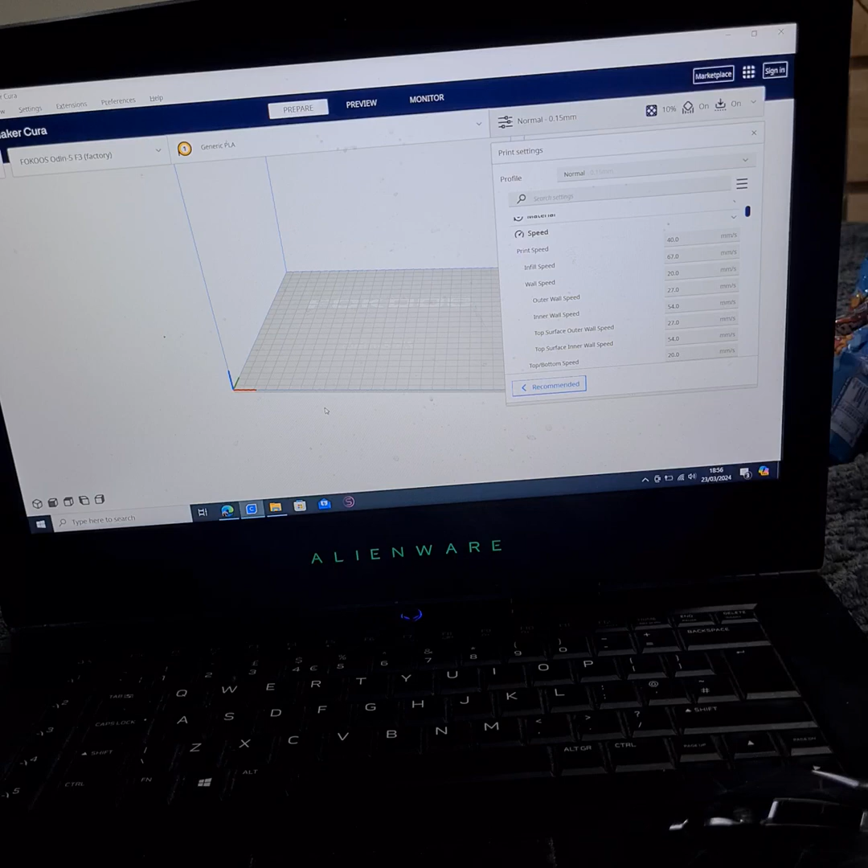Okay, so let's get going. Right, so you've been printing for a while on Cura and you decide you want to print something bigger for a change.

What you actually want to print is a giant robot with a big chest to go with it.

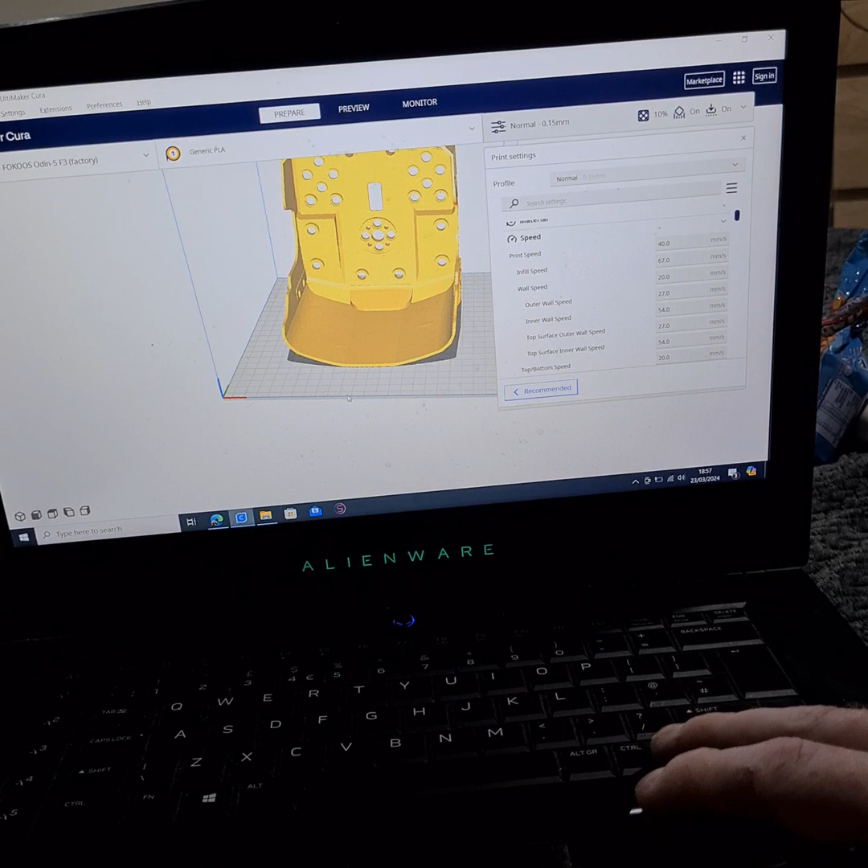So you've been using the factory Fokoos settings that Cura gives you. You arrange it where you think it's going to print really well. Face down, there we go. And that's the print speed on 40 and all there.

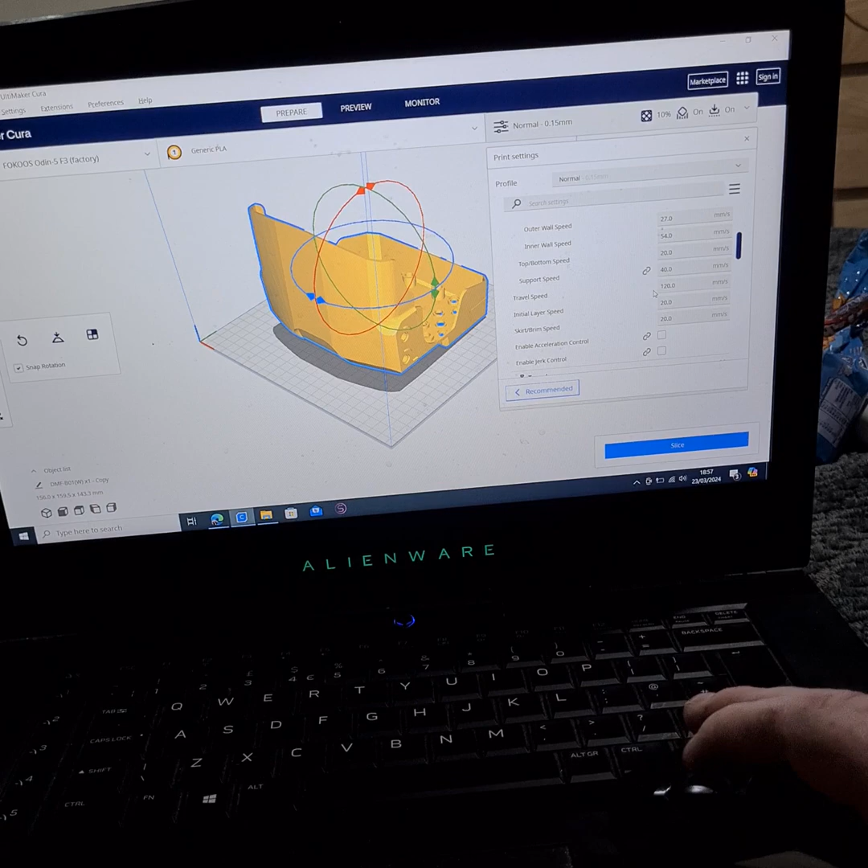We'll show it on basic for a second. Speed 40, maybe it's advanced. Infill nearly 70, wall speed 20, blah blah blah. Travel speed 120. Hit slice.

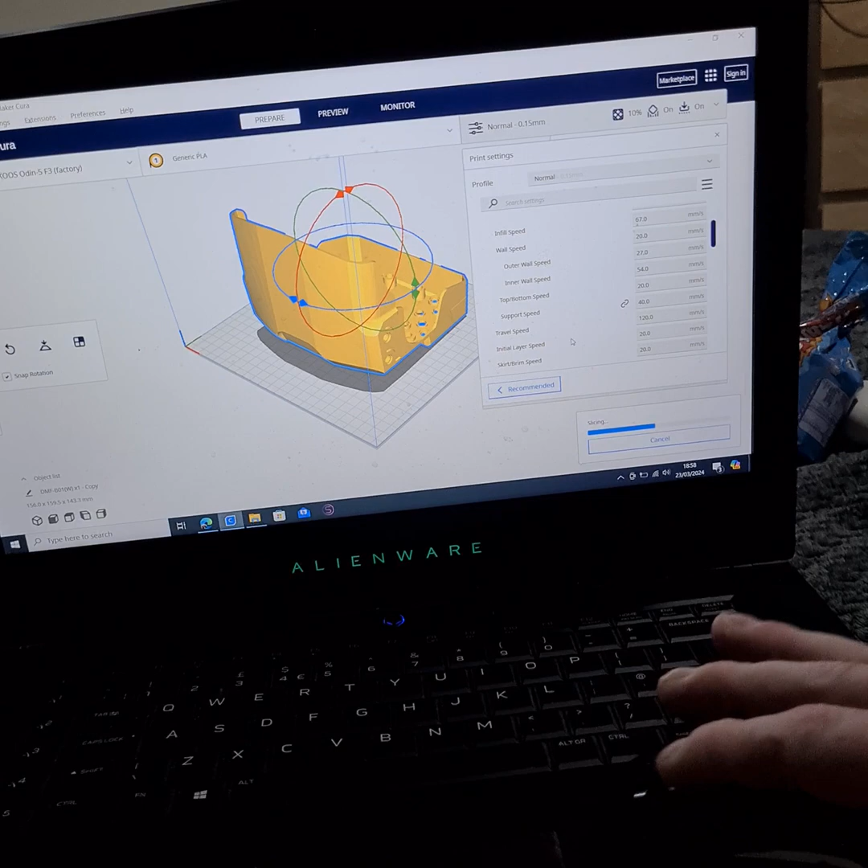When it finally catches up... Yeah, we'll leave it at that for now, on the normal. Yawn, taking a long time. It's going to take a full day to print at that.

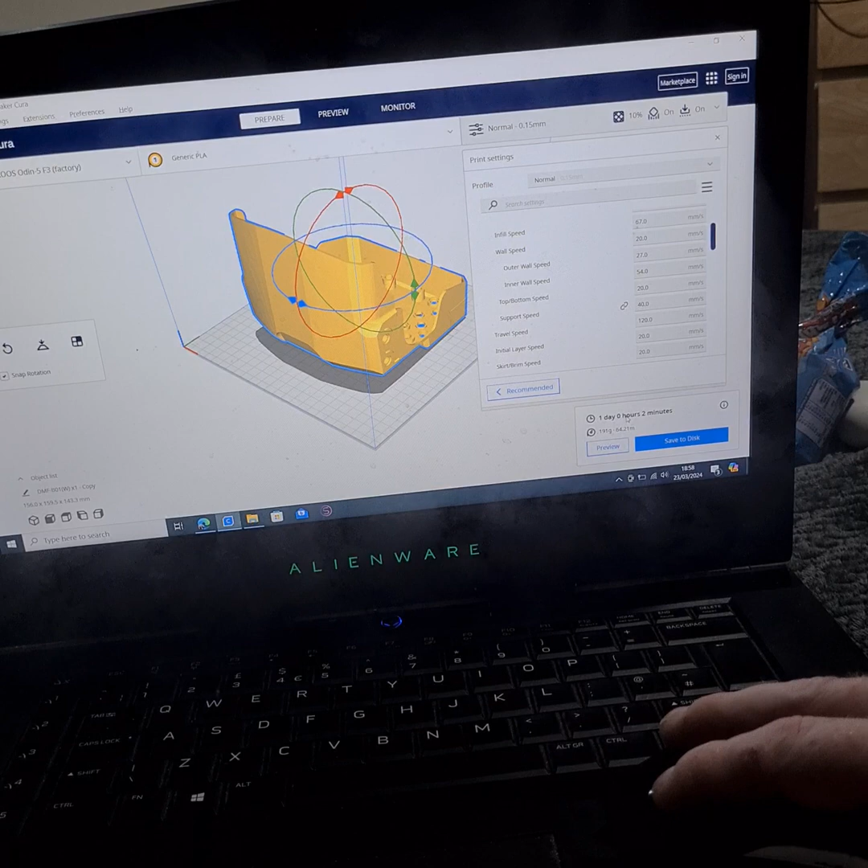So you think, right, I'll do it on the draft settings at 0.2, and we'll see if this is any better.

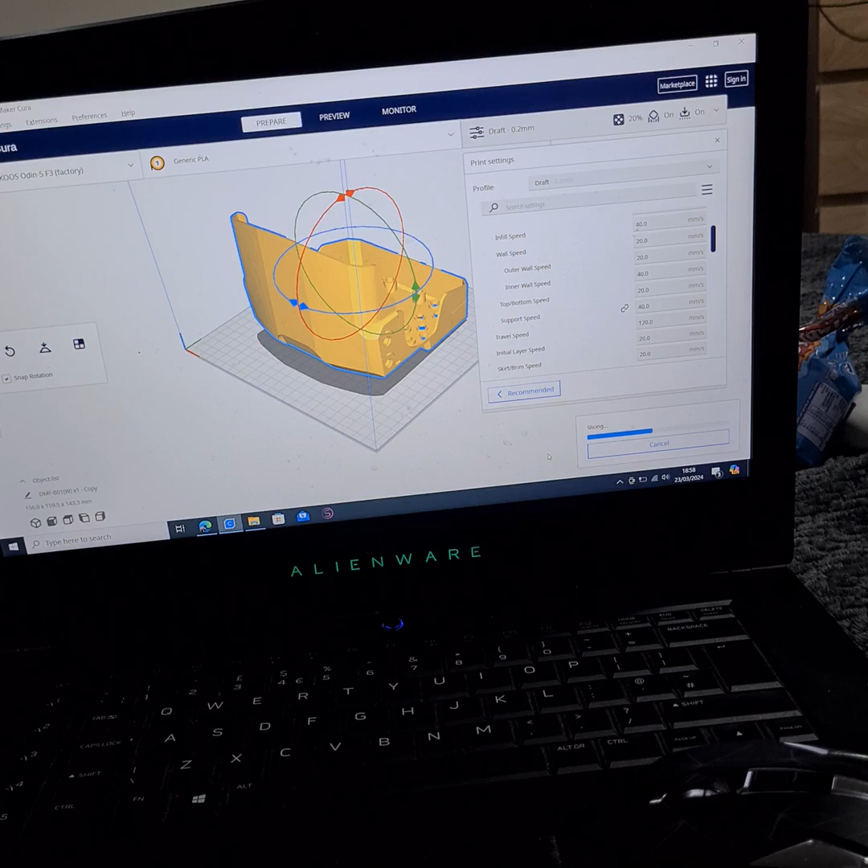And anybody that uses the factory settings on Fokoos as well will tell you that it quoted as a day, so it'll probably take 2 days, because that's the way that it works, unfortunately. But we're going to fix that anyway.

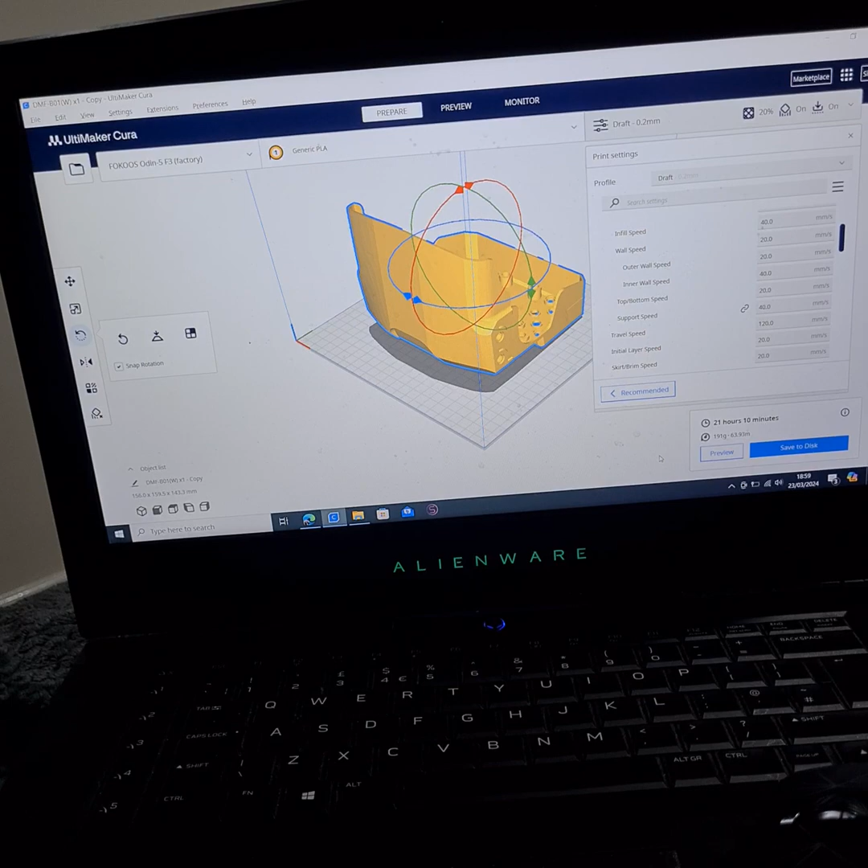Yep, so now we've chopped it down to 21 hours. Not quite what we're after.

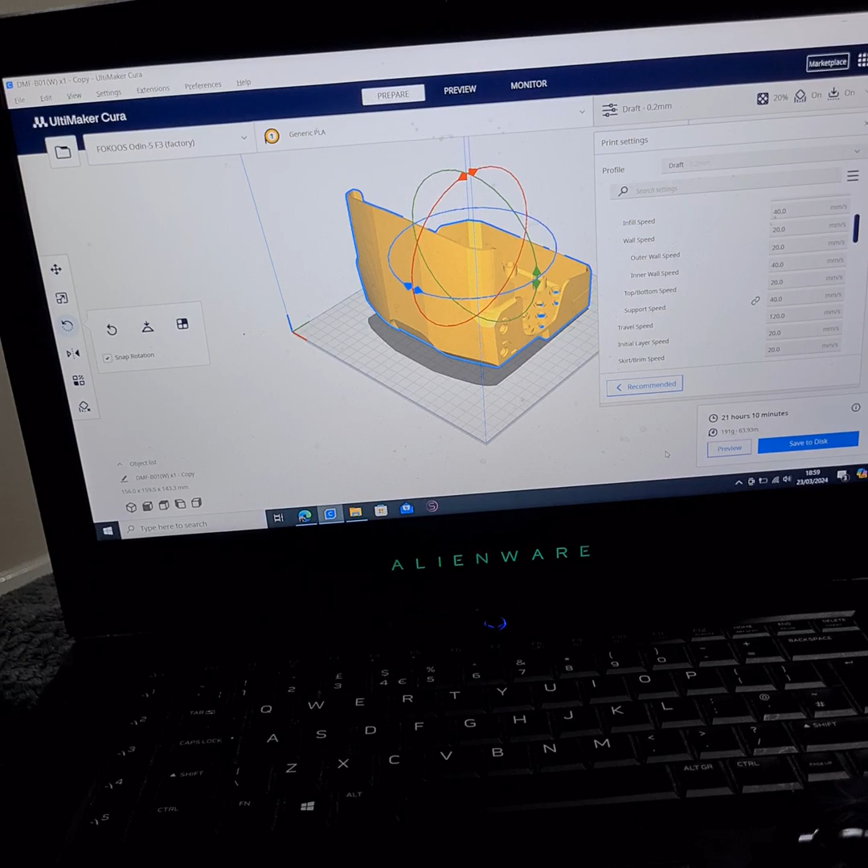So you think, I'll message me mate who's got a Prusa Mark IV, and we'll see what, just run it through the slicer and see what he gets. And Prusa Slicer turns around and says, nearly 8 hours.

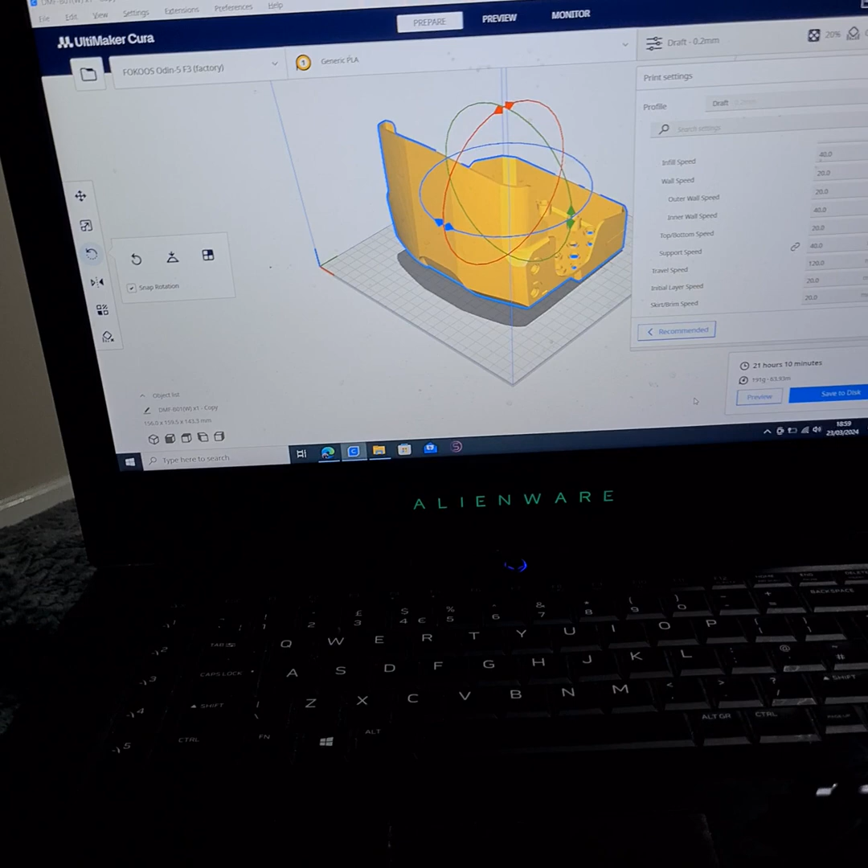There we go, at the same direction. Now, I don't know what settings, what speeds they've got. Well, let's have a look.

Prusa Mark IV, and it's 800 quid. And let's see. Features: high printing speed, blah blah blah.

Maybe I'm just jumping too fast, but anyway, you're thinking, well, there's got to be a faster way. Has to be faster. So you start YouTubing for videos to make it faster, and you do manage to chop the time down a little bit, but still, it doesn't work.

So you go to Fokoos, you have a look at downloads, and you go to the Fokoos Odin-5 F3 printer. Yeah, import Cura profile. Seems pretty good.

Odin PLA, there's a picture and a picture and a PDF, and you think Odin PLA, yep, it'll be in there, right? Yep, download.

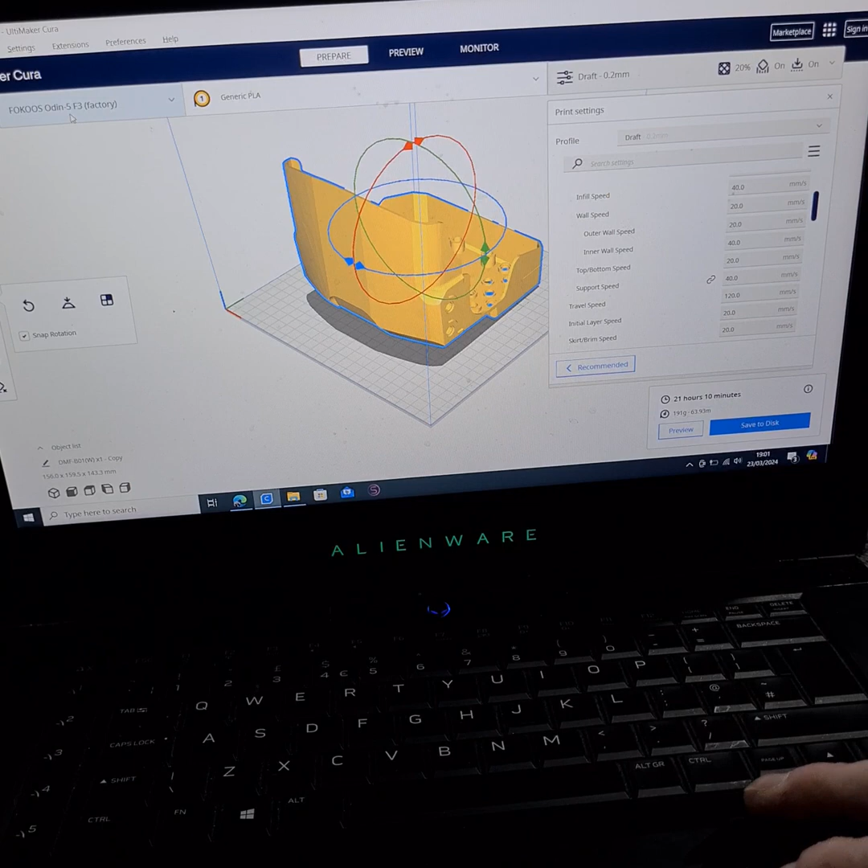So you go to the Cura factory, manage a printer, and profile, import, downloads, Odin PLA, and it's not there. Well, that sucks.

So why is it not there? Well, it's because it gives you a lovely little text file instead. So we'll open Smoothie Odin PLA with Notepad.

Better not make it want to open that every time. So what's this? Draft Odin PLA FDM. Yep, skirt layer height, print bed temperature 60. Layers. Nothing in there really that's going to speed anything up.

Except retract before extra wall. So you open up the next one, and here's some stuff. And so you've got acceleration settings, bottom layers, blah blah blah, print temperatures, flow, speeds are here somewhere, retraction stuff, combing distances, all that good stuff.

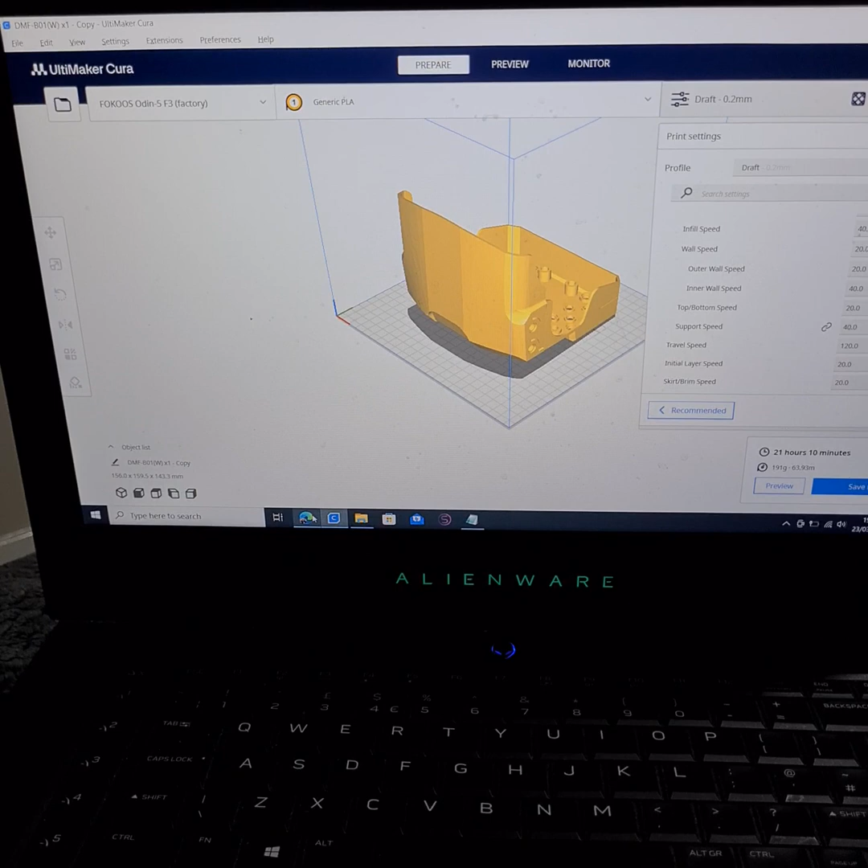Except, since it's not a profile, can you imagine taking forever putting all that crap in? So the next smartest thing for me to do was add the printer, add a new printer, find a printer that almost matches the Fokoos, which turns out to be a Creality Ender 3 V3 SE.

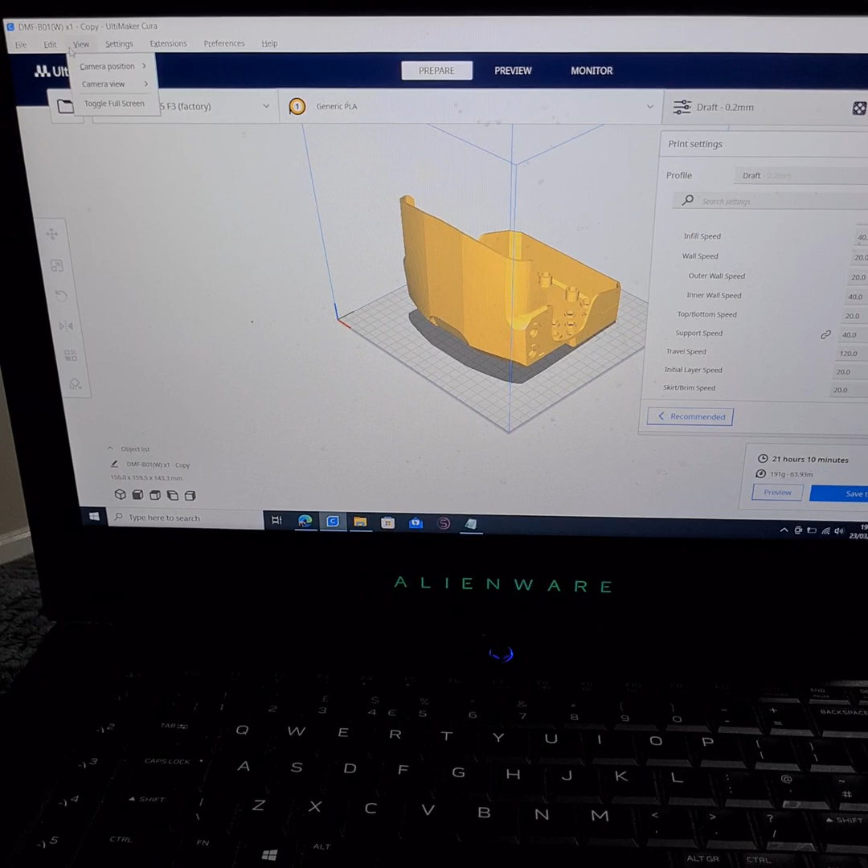I have checked the settings, I'll show you it in a bit, but printing speeds at 250, blah blah blah, all that good stuff. So let's add that into Cura instead. So: file, edit, printer, add a printer.

Non-ultimaker, Creality, Ender 3 V3 SE, cool, add.

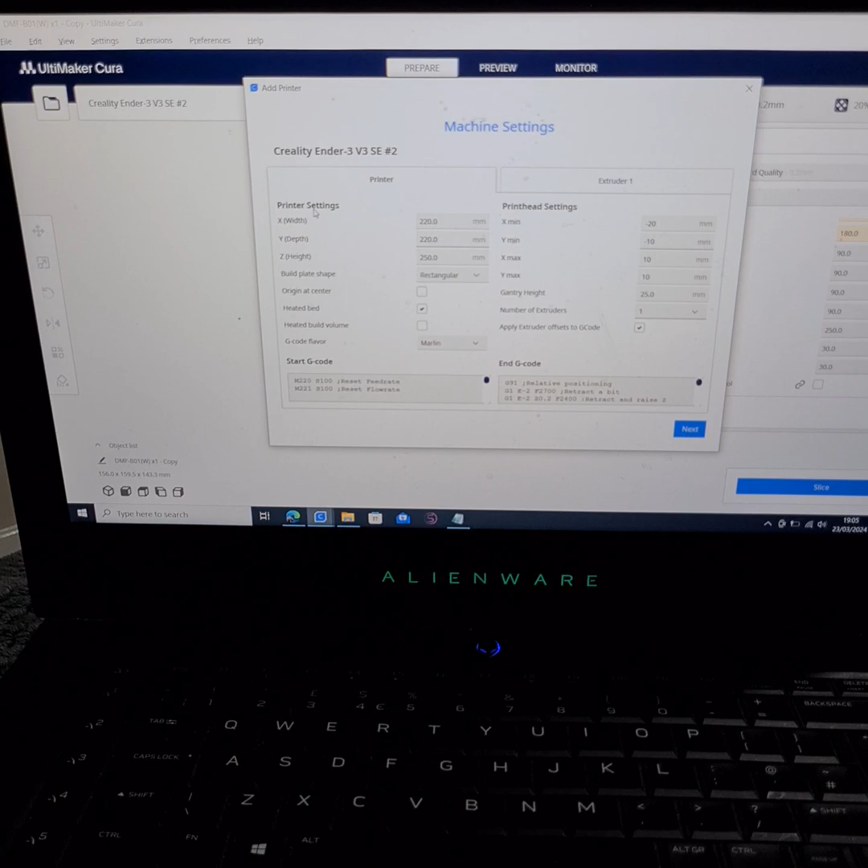Right, and the width, we'll change the bed there to 235 by 235, Z height at 250, so that's bang on. Heated bed, yes, perfect. Build volume, start Gcode.

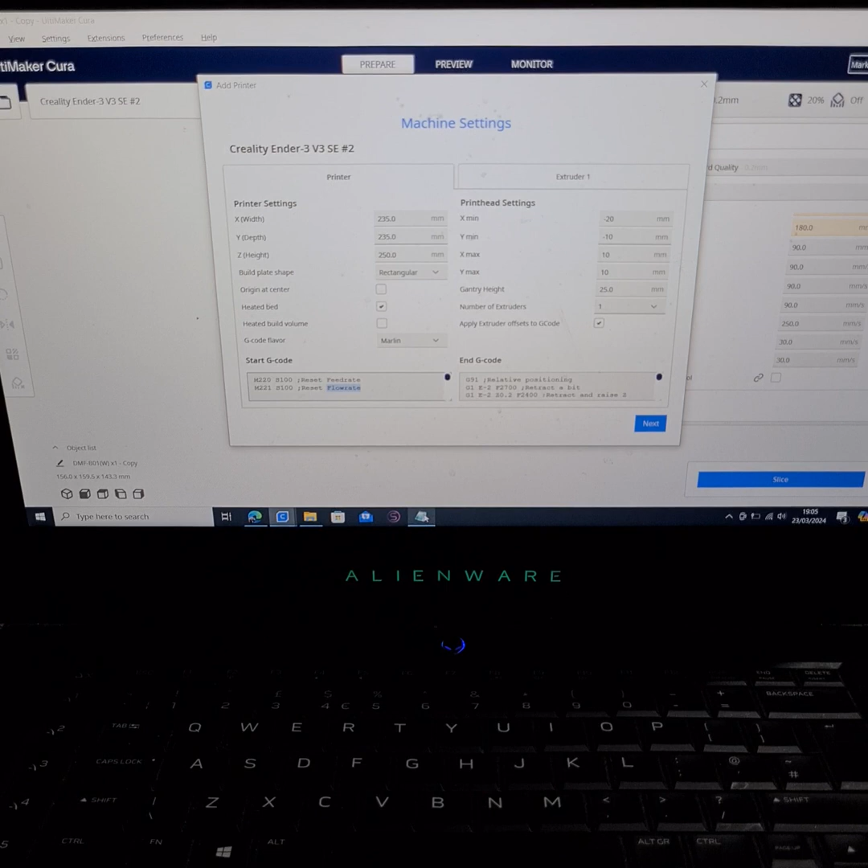Okay, and was that in here? No. Was it in here? No.

However, I've already got it copied, but let's just say it's all that. I believe that was correct, the gantry height. Don't recall the gantry height, but let's have a look.

Blah blah blah. Nah, nothing regarding the gantry height, so we'll just hit next. Oh, extruder 1.75, nozzle offsets.

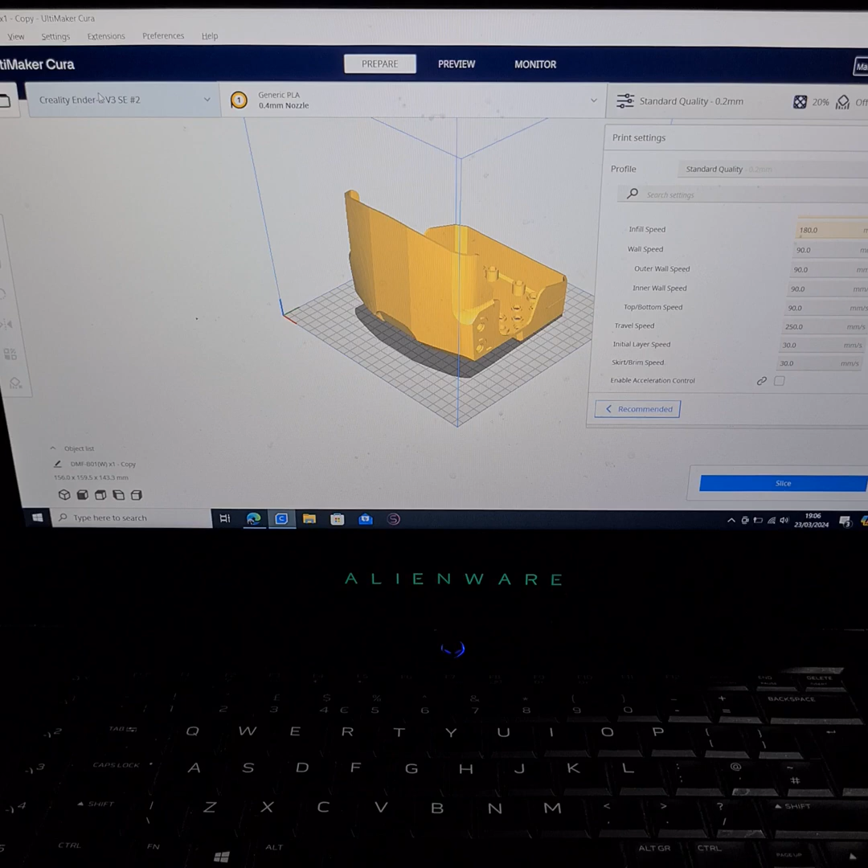Right, okay, so now we'll file, right, manage printers, right, activate the factory one, machine settings, 235, 235, right, so we've got 20, 10, 10, 10, 10, 1, and apply the Gcode.

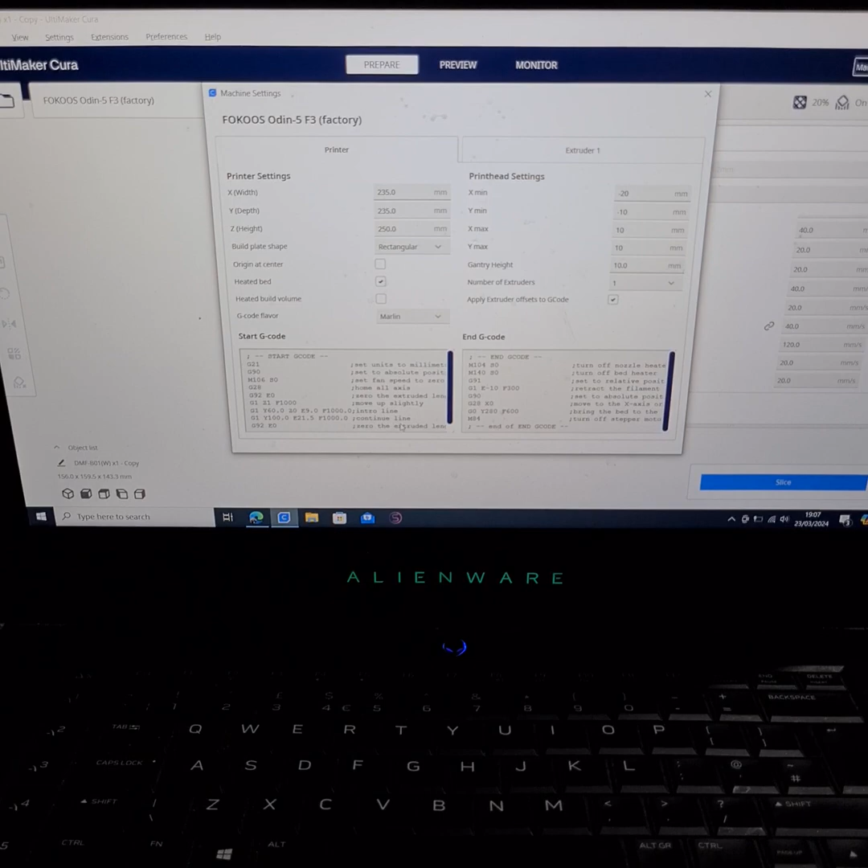So we'll copy the start here, Control A, copy, close, activate, machine settings, gantry height was 10, start Gcode, Control A, and then Control V.

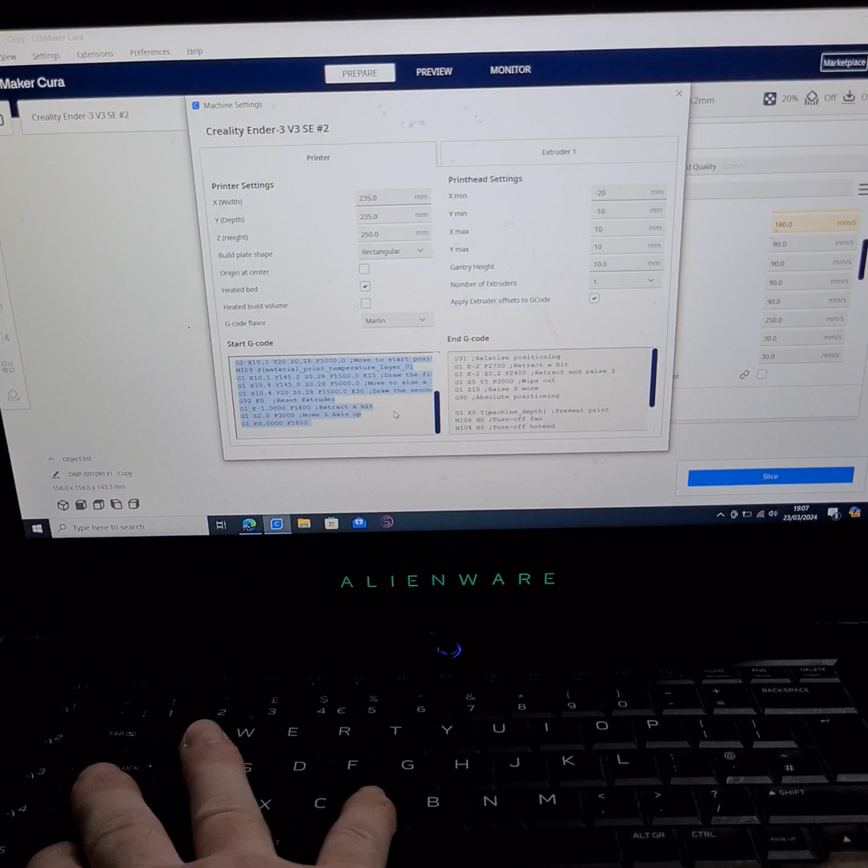There's what's starting Gcode. Extruder, nothing, nothing, nothing. Alright.

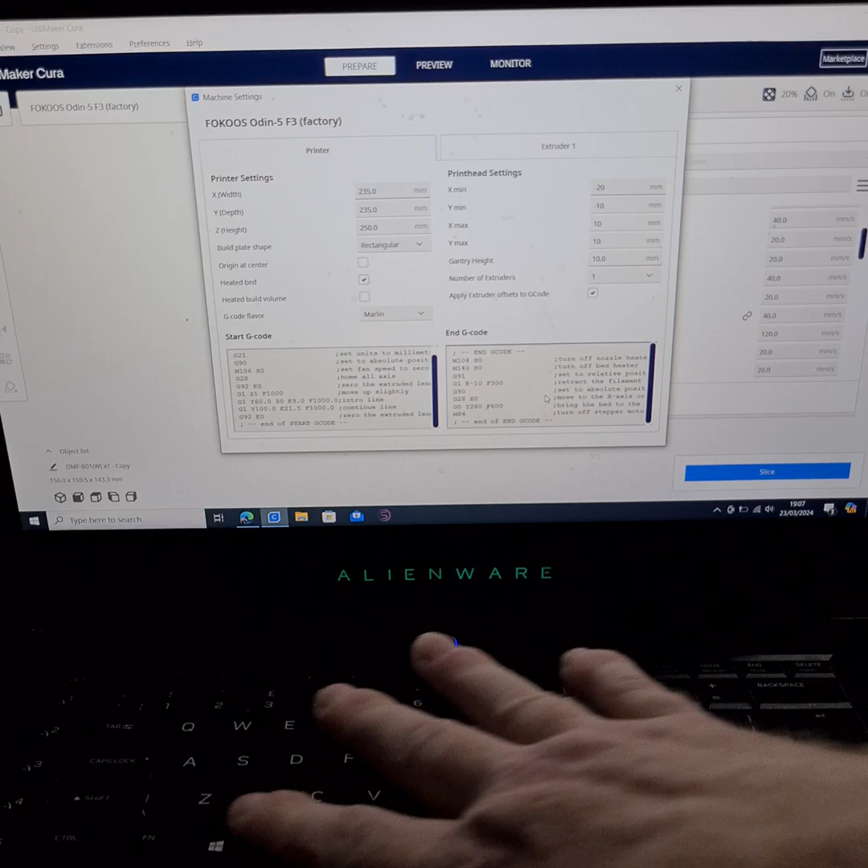Okay, so we'll go back to a factory, activate the factory, and get the ending Gcode. Control A, Control C. Just double check that. Oh, and nozzle size. Don't need to do the nozzle size.

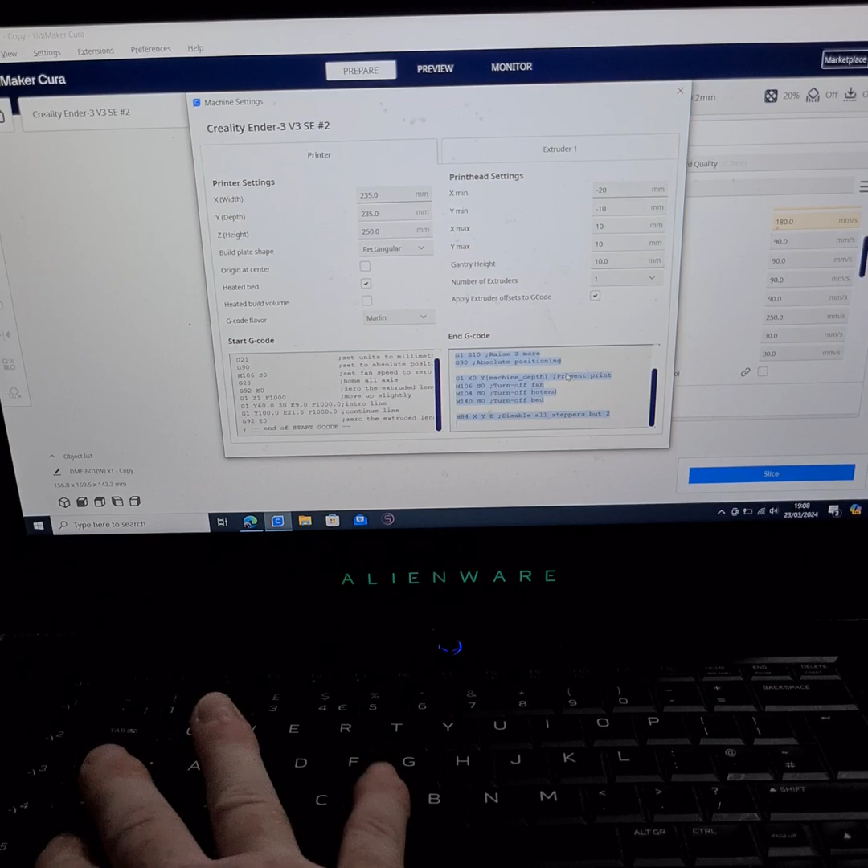Okay, back to SE, activate. Machine settings, ending Gcode, Control A, Control V. There we go. And we're all done. Okay, close.

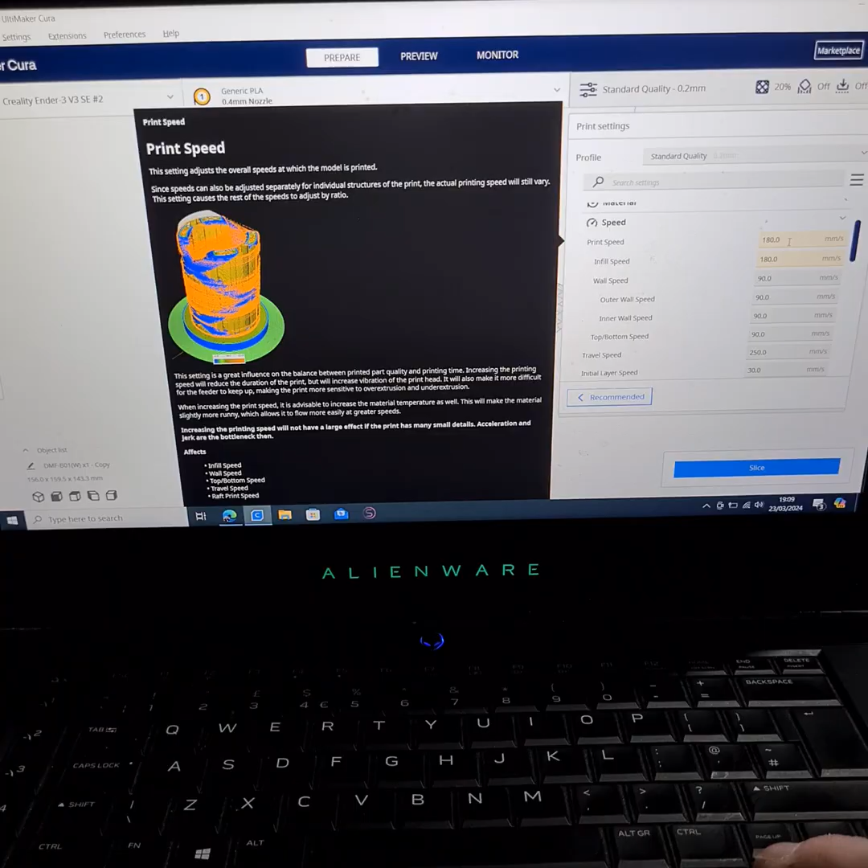Now we could set up the MKS Wi-Fi plugin on it, which would tick it. Yes, preview settings, yes, Wi-Fi support, yes. No, no, no. Default. Close. Close. And there we go. We've got some pretty fast speeds there already.

And so it's printing at 180, 90, 90, travel speed 250. Okay, now that's at a 0.2.

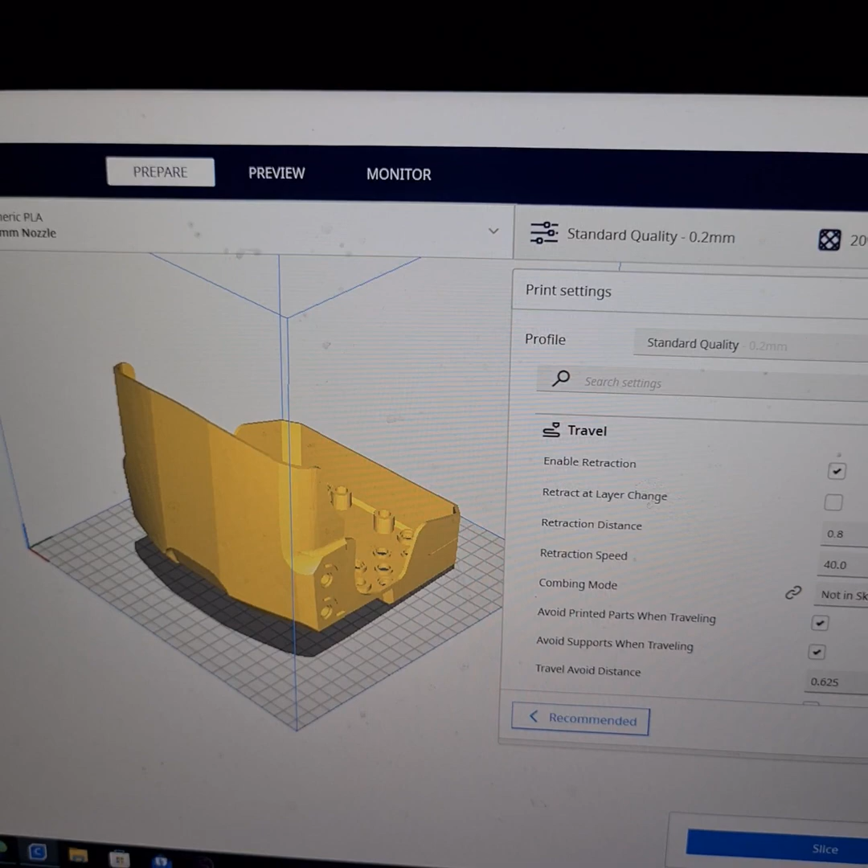And now is the point where you could manually enter your things from here, from the file we downloaded. But I'm going to share this profile.

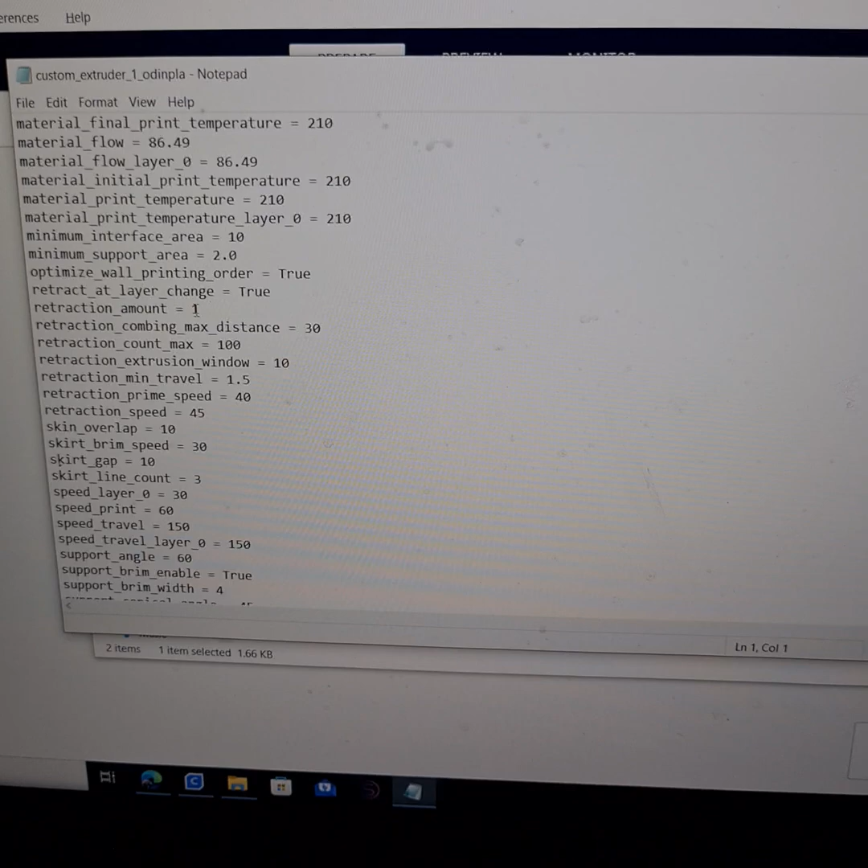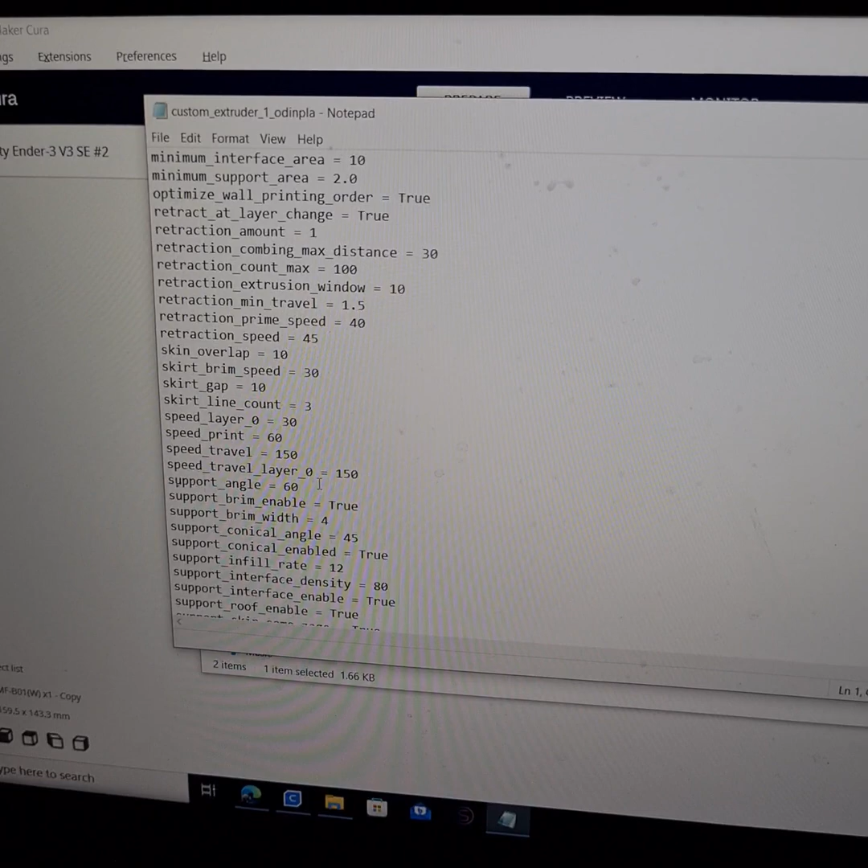What we're interested in is the retraction stuff. Retraction amount was 1, and the speed is definitely capable of 150. And obviously I've tested it, I've ran it faster, so mine's a bit faster. Support angle of 60, all that stuff.

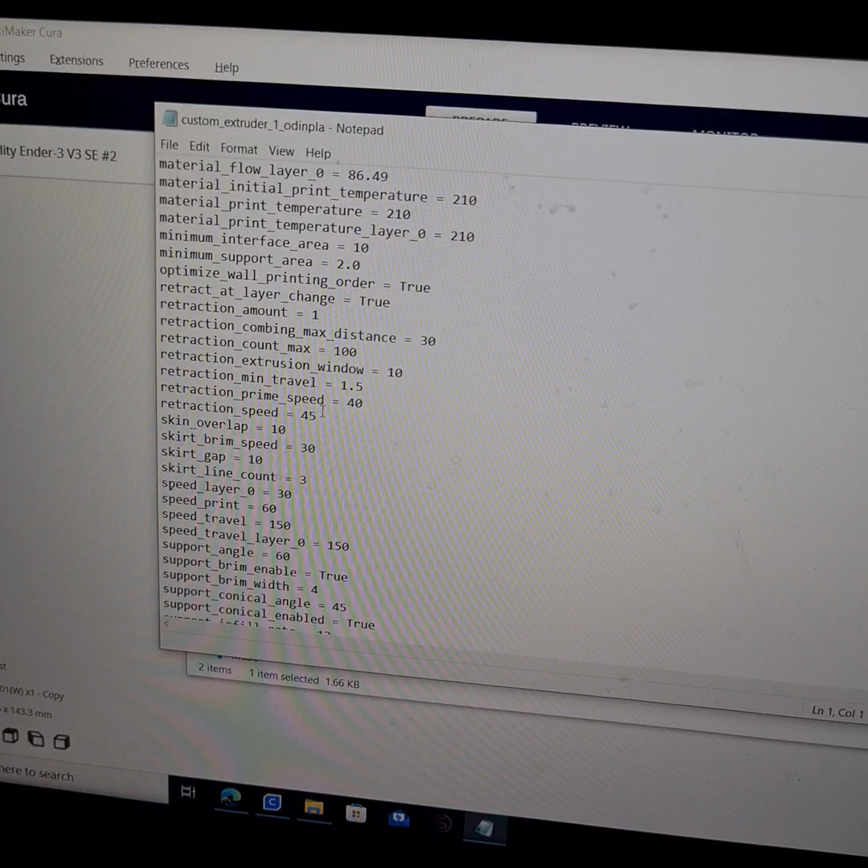Yep. And I know there's jerk settings in here somewhere, because it tells you to set the jerk at 10 and the acceleration at 800. And the retraction and things, support angles, blah blah blah blah blah.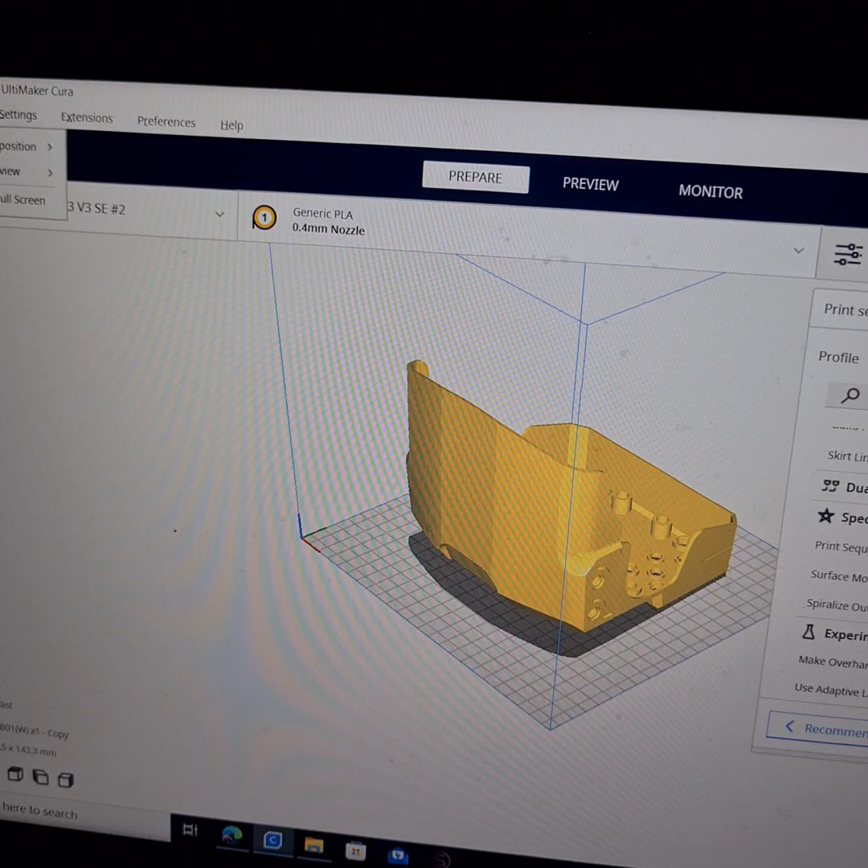Right, however, at this point you would go to... oh, also the retraction speed doesn't work very well at 0.1. It's actually faster running it at my settings at 1.2.

And so we go profiles, import, and we'd import our 2 profiles. I'm not going to do that because I've already got them, you know, they're there already.

Okay, so now I could go there. Oh, you at this point you might want to close down Cura and reopen it, because even though you change the bed size and everything else, it doesn't actually adjust the bed size.

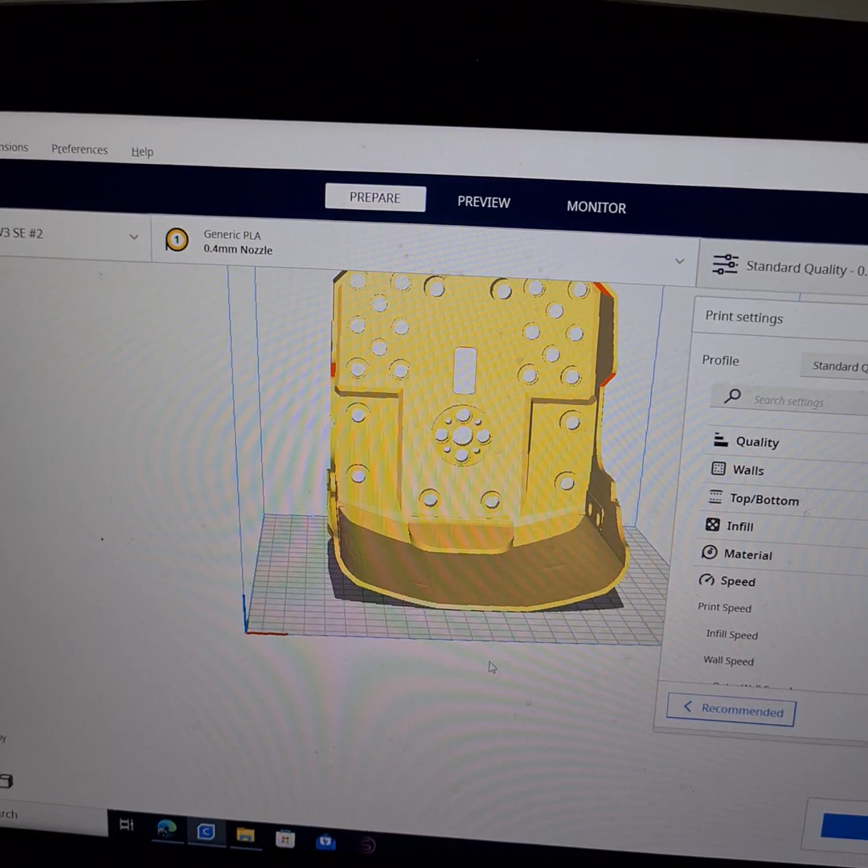We'll close that off. Won't close anything else off. We'll just go to my 3D Designs, STL. How about mini doubled body? Drop you in, rotate you around.

We are on the Creality that we've added, and we know our bed and everything is set up perfectly, and we hit slice.

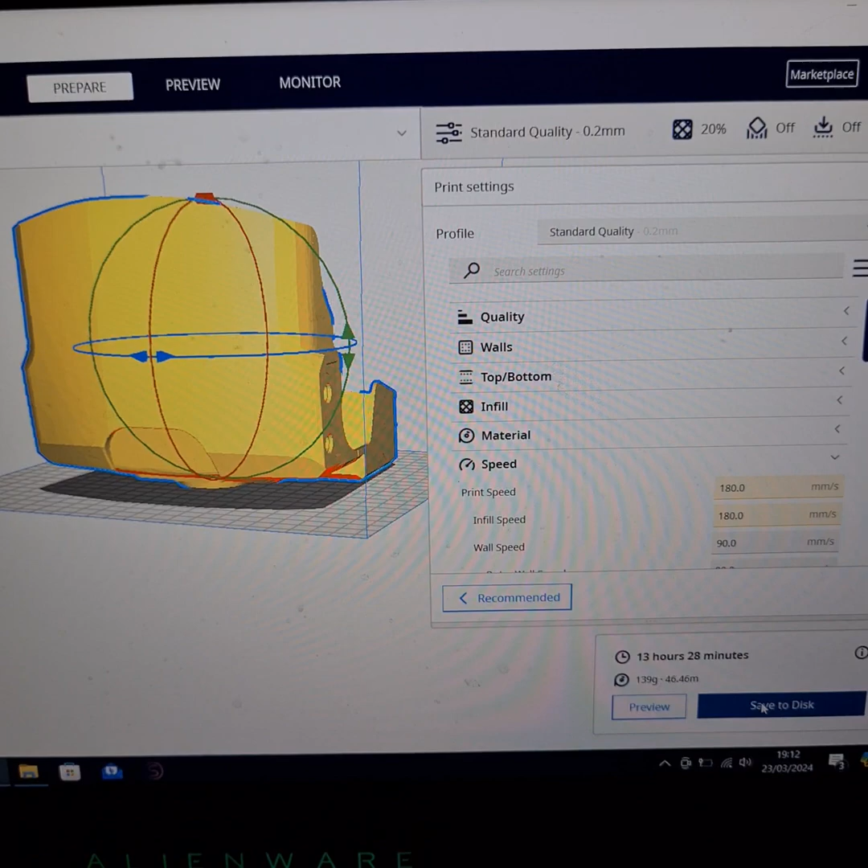Oh, that's a standard quality, it's not using my profile. But 13 hours on their standard.

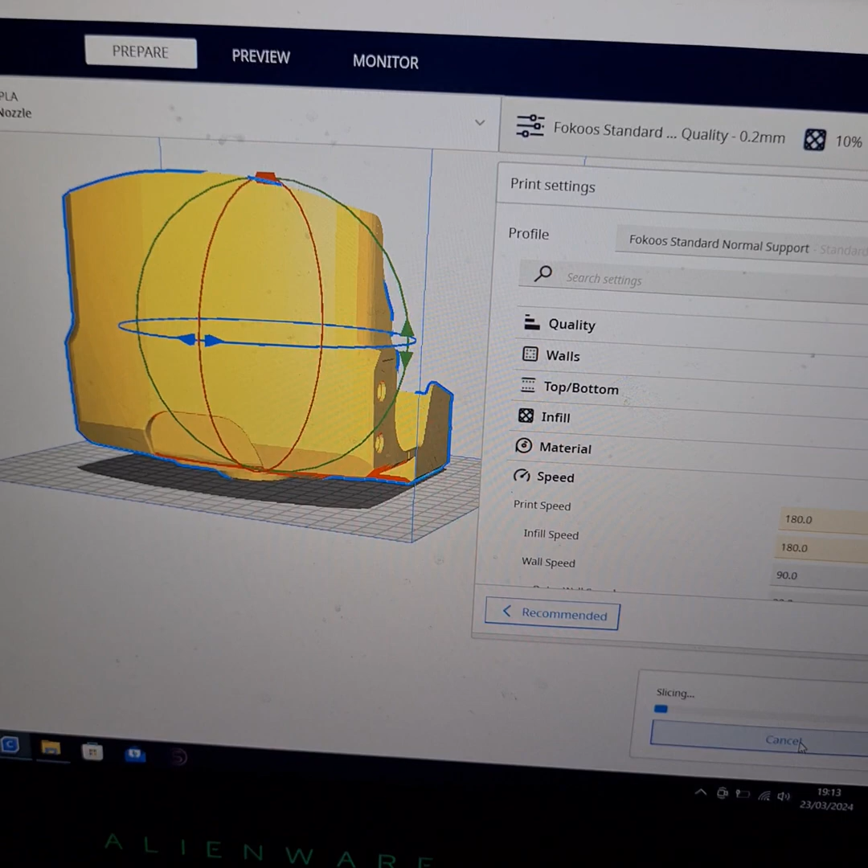So we'll use my standard normal support. By the way, I have things on mine like combing and things, so you know, you should get better quality.

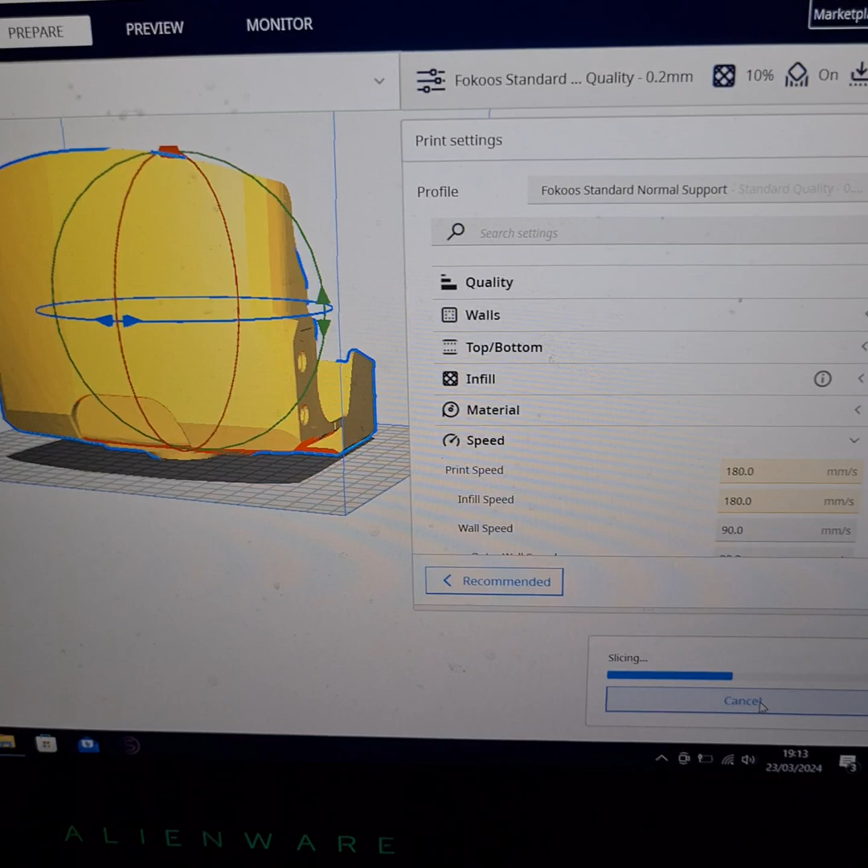And the only reason I add the Creality Ender is because it's so close to the Fokoos settings that they give you that it was faster to just modify that than create a load of others.

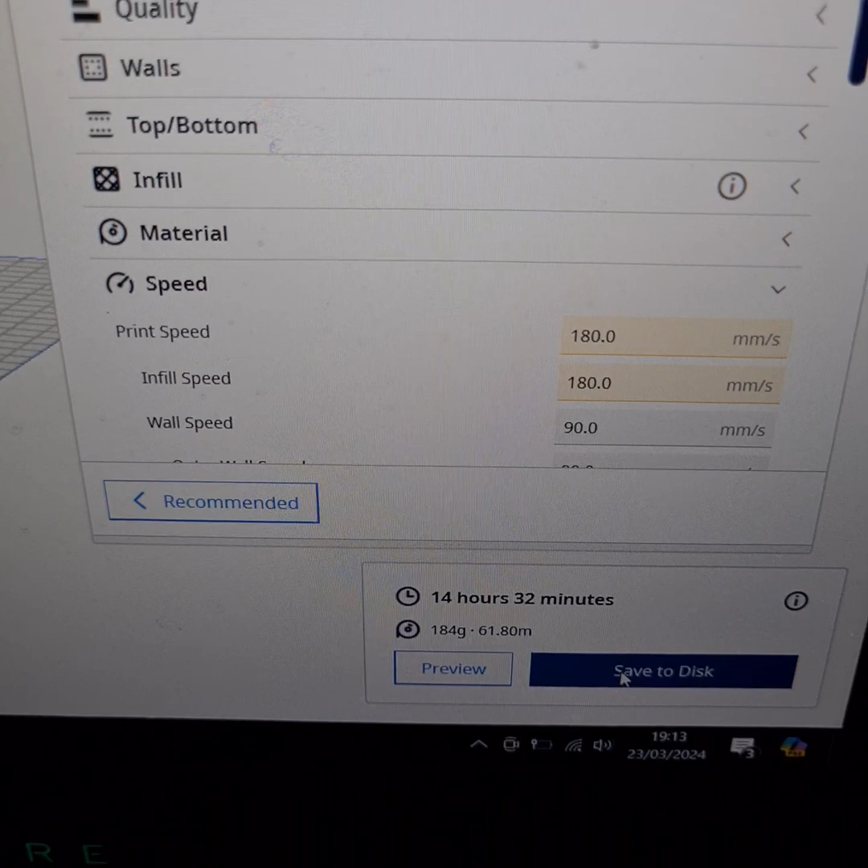Okay, and now, although it's not as fast as theirs, but I know theirs doesn't have supports enabled and whatever else, but there's 14 hours and 32.

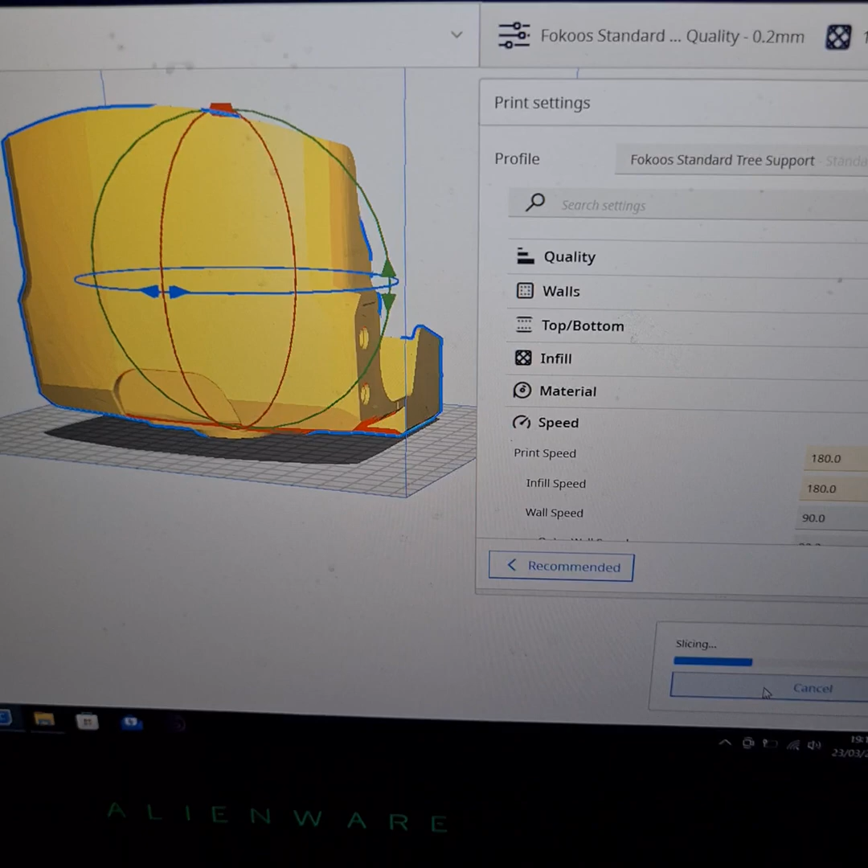And another benefit of it is it's actually accurate. What it quotes you, chances are you'll be done quicker than it actually quotes you. That's with the tree supports.

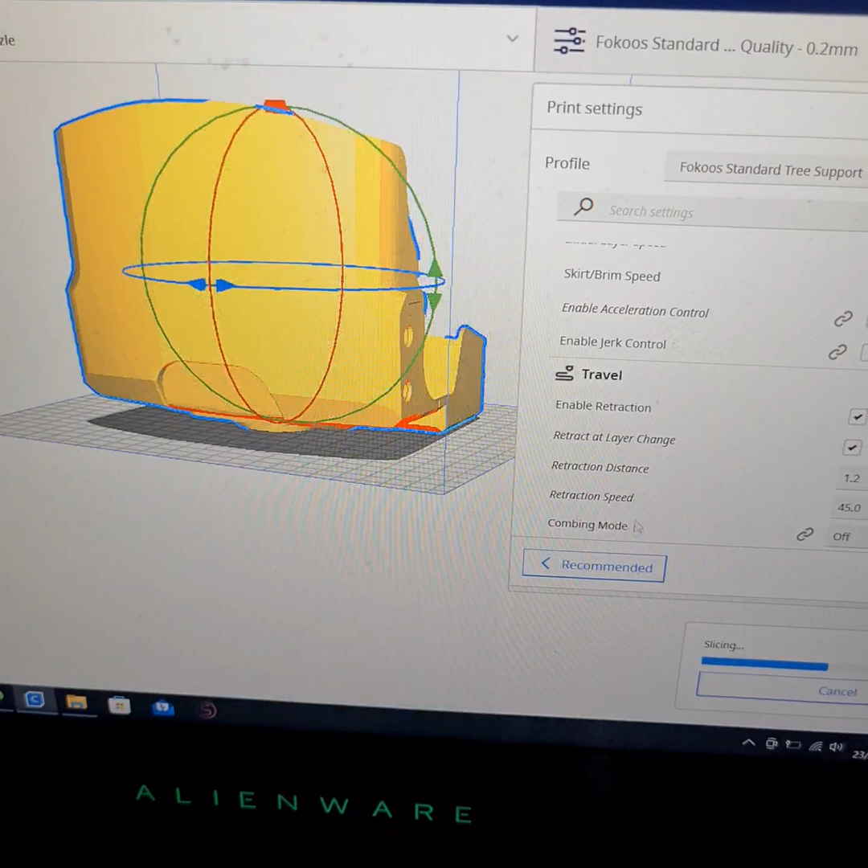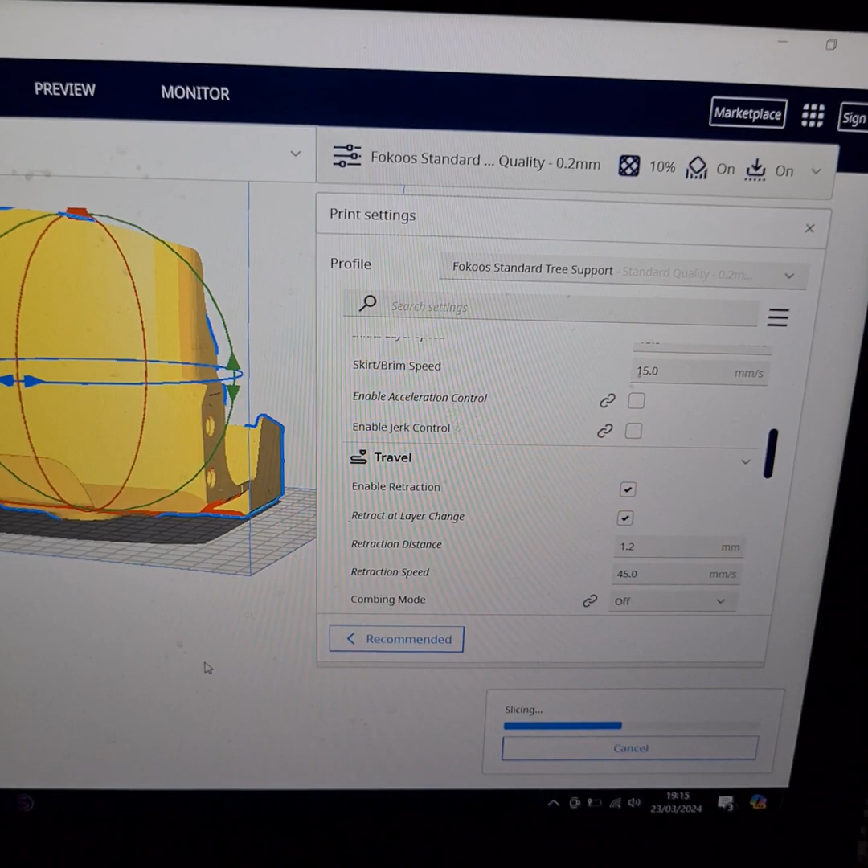Now, I do recommend searching around YouTube for videos on how to make Cura faster, and you know, some might work, some don't. I mean, I don't know how many hours worth of watching videos and familiarizing myself with Cura, but yeah, these settings I'm happy with.

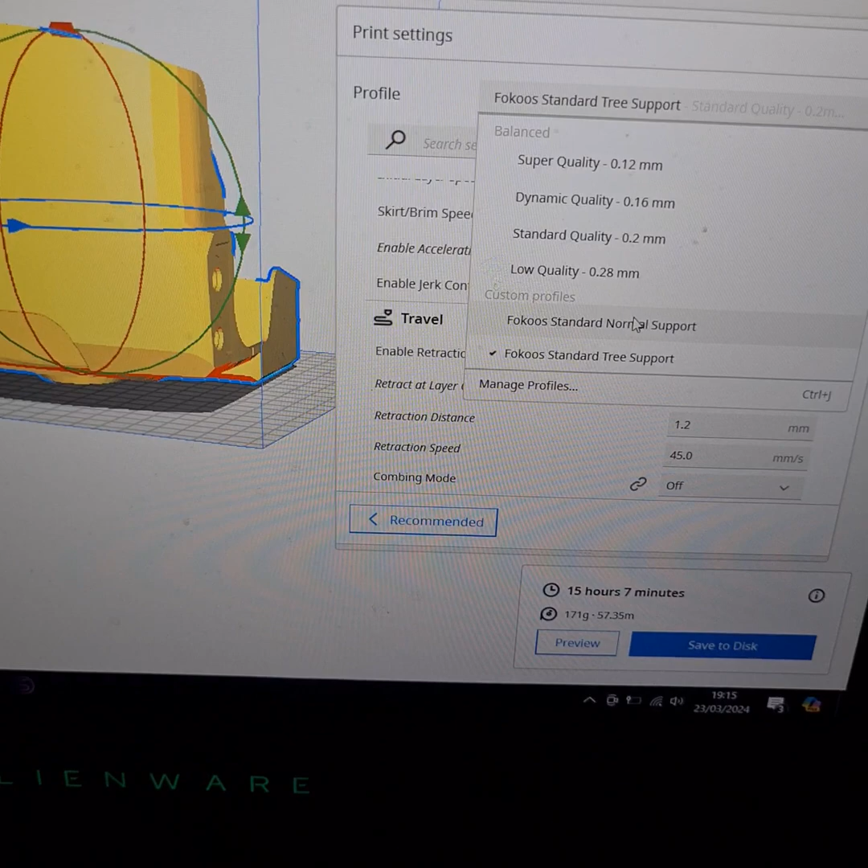15 hours and 7 minutes, and that's putting tree supports in. If I did just normal supports, like what Bruce did for me mate, it won't take, like I say, 13, 14, 15 hours, it won't take that time. It'll actually be done quicker.

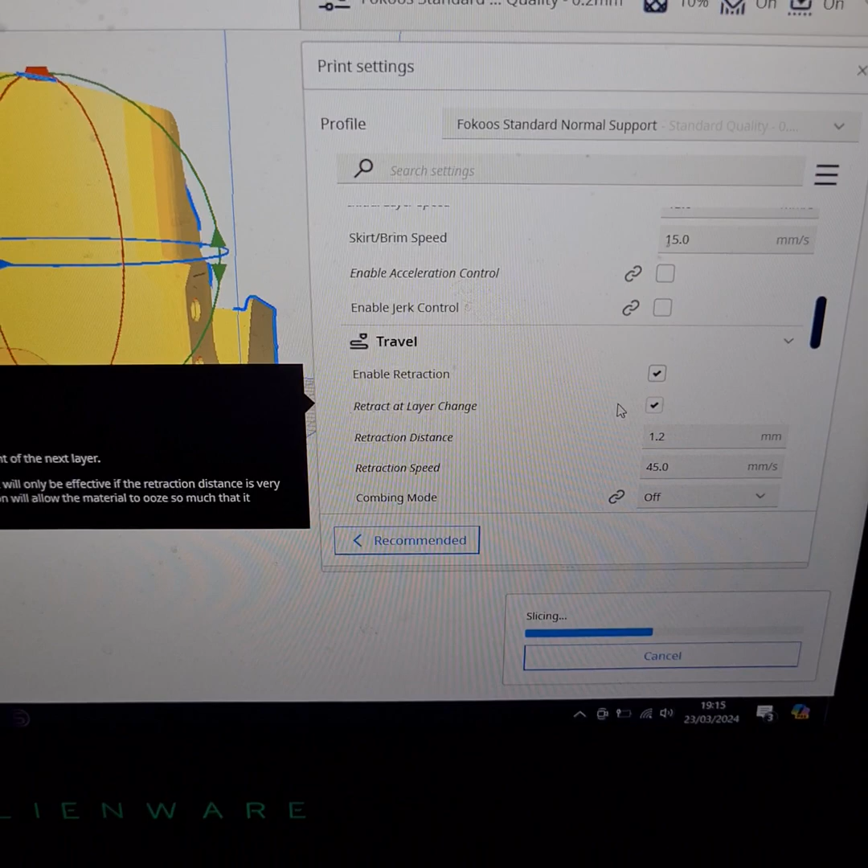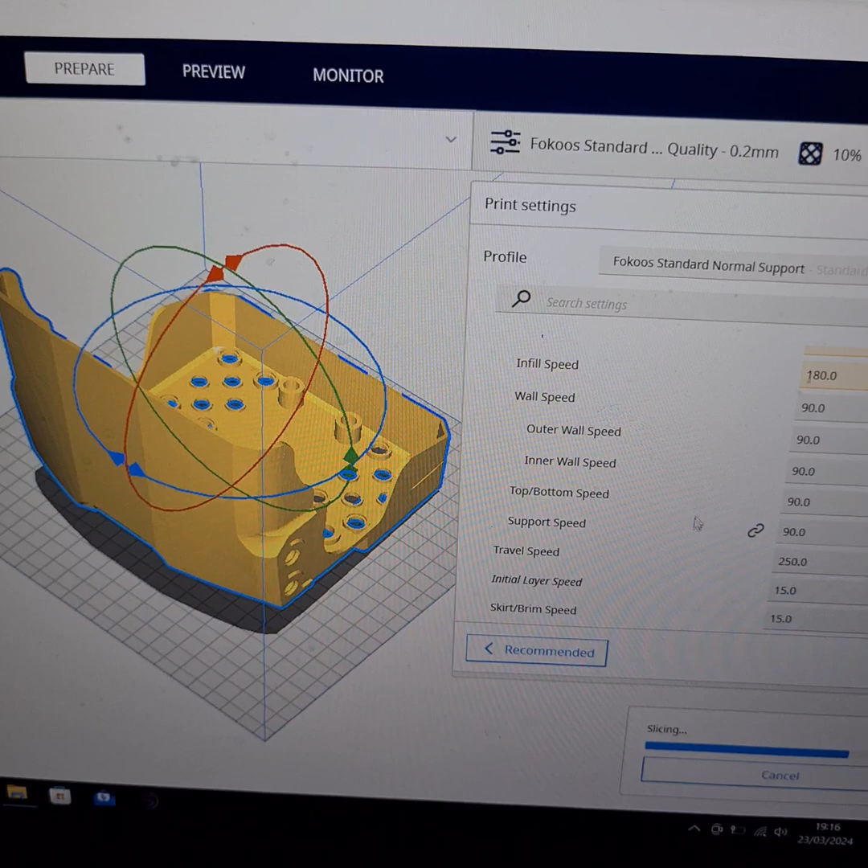But because this part takes up the whole build volume, it's got loads of circles in it, my first layer is slowed right down, initial layer speed. Speed 15. I mean, even from that notepad it said 30 for the first layer, and you saw from last night

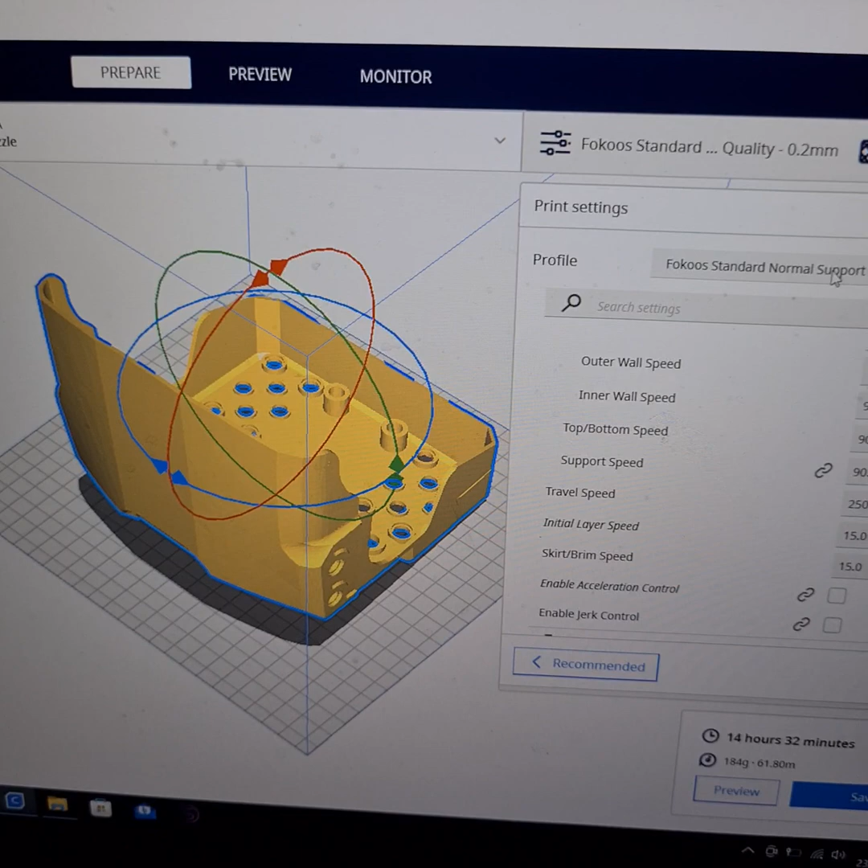it took 40-50 minutes to get off the first layer for us. Obviously if I doubled that speed it would have been done in 20, so 20 minutes knocked off your print time. Okay, that's 14 hours.

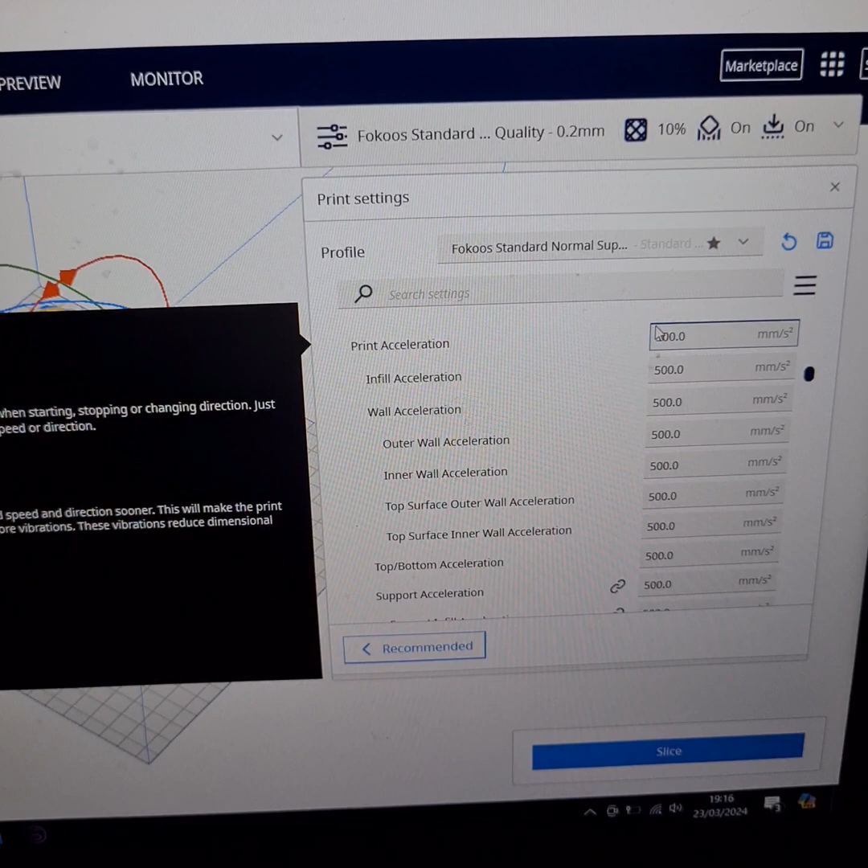Add the acceleration control, show all of our settings, and then when we look at the acceleration it's set to 500, so let's bump that up to 800. Yep, okay, slice.

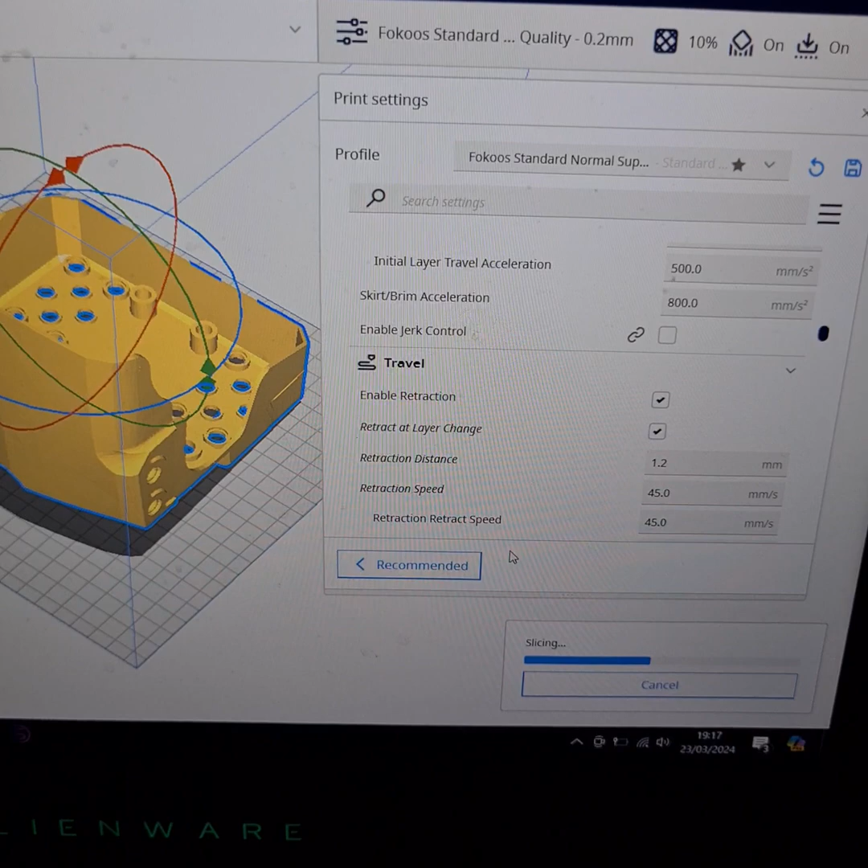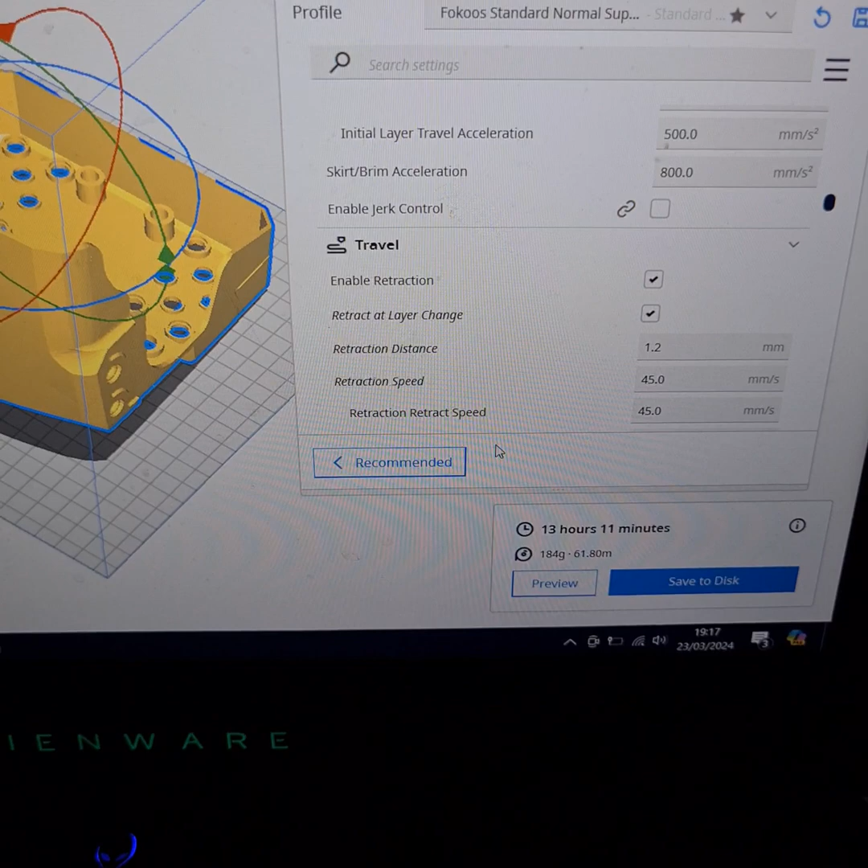Yeah, like I say, I've got retraction at 1.2. You'll come across things on YouTube videos called magic numbers. Basically, at a 0.04 change, that's a magic number that matches your stepper motor drivers when they step 1 degree. 1.8 degrees is roughly what all stepper motors are on, and that equates to 0.04.

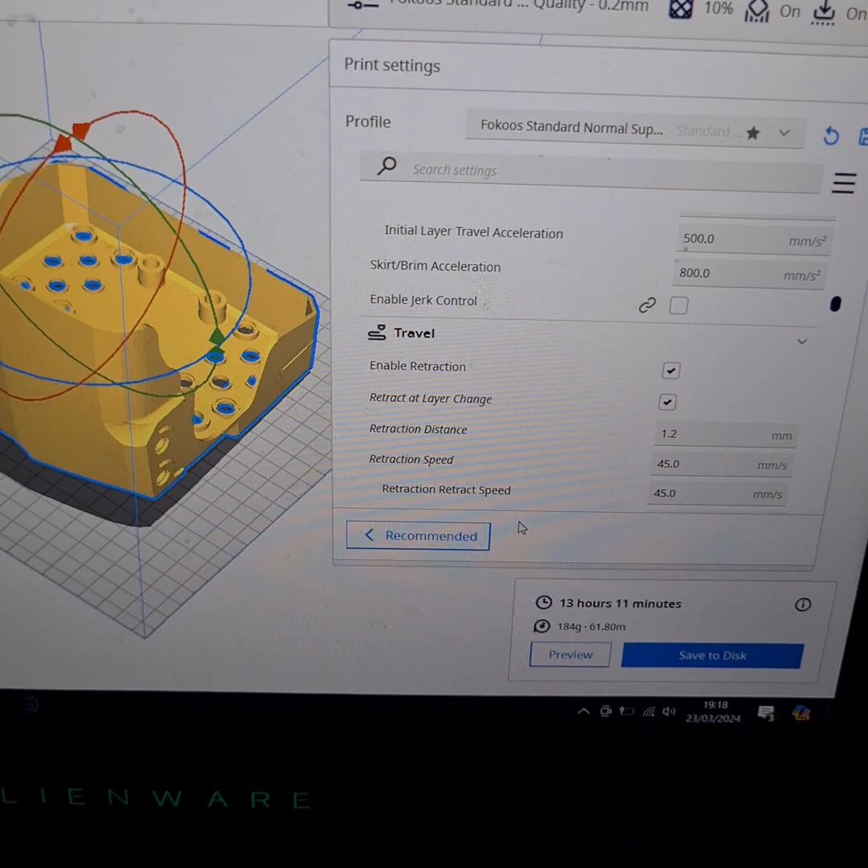So 1 millimeter for what Fokoos recommend is actually suboptimal, and I didn't want to go at 0.8, which is below what they state, so I went to 1.2 for retraction distance. Okay, that's got down to 13 hours 11 minutes.

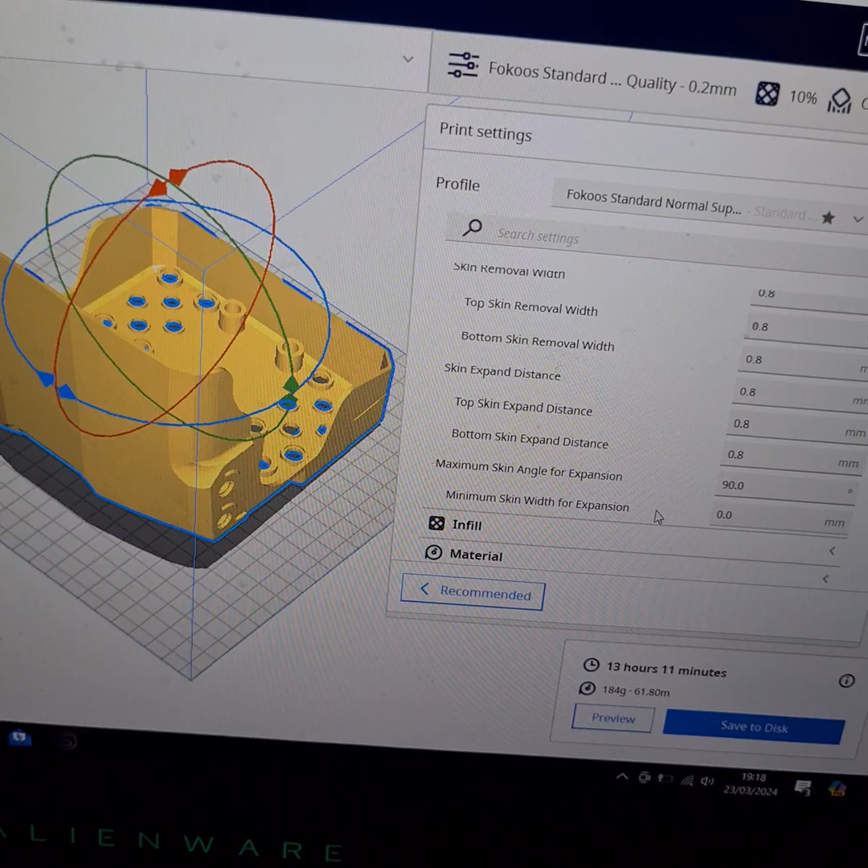You know, there's other things you can do, like taking walls away and blah blah blah, wall thicknesses, all that stuff. Top and bottom. Do you really need 4 layers on the top and the bottom? Do you really need support? I prefer tree supports when I've got details up in the air.

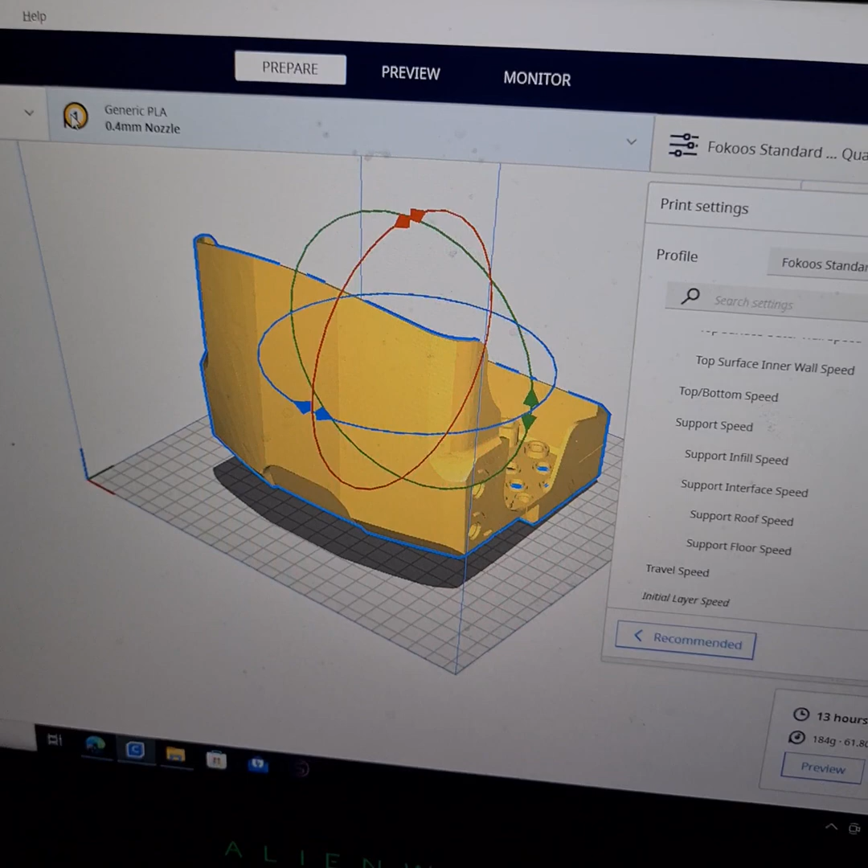But yeah, if you want to change your, it's on a 0.4 nozzle already. If you want to change your PLA color for your print, same deal as before.

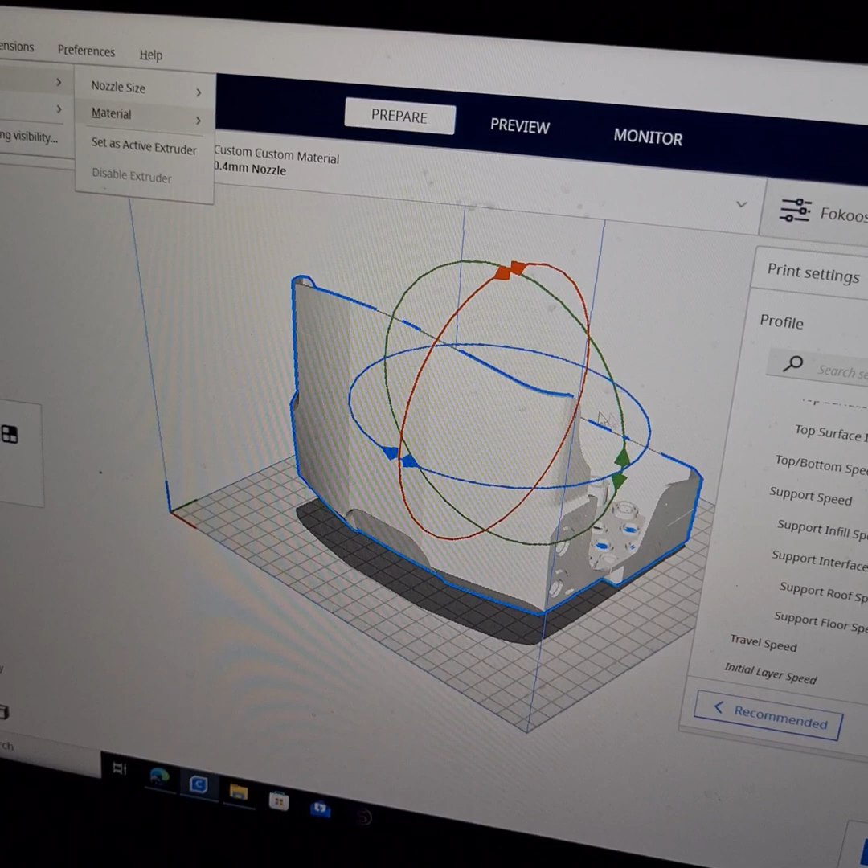You go to settings, extruder material, custom PLA, custom material. Discard my changes because I'm not interested in it.

Okay, extruder material. Yeah, it's obviously in settings, configure settings, materials, sorry, create custom, create new, blah blah blah. I'm in white. Job's a good one.

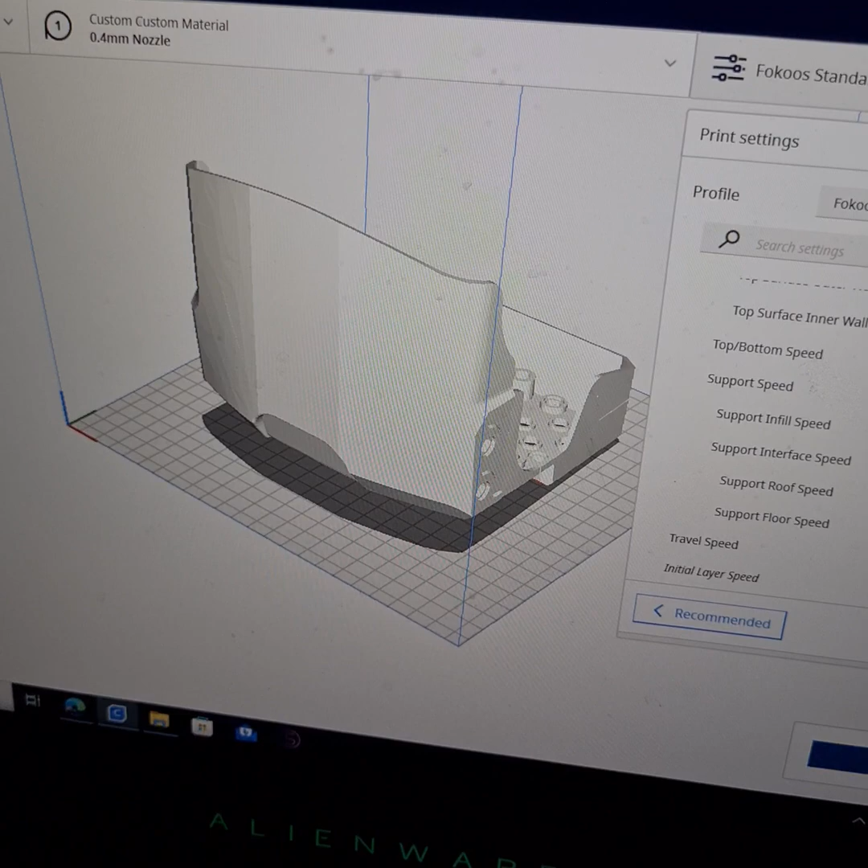Then you can slice it, send it to the printer, and you're printing with way better settings than you ever had.